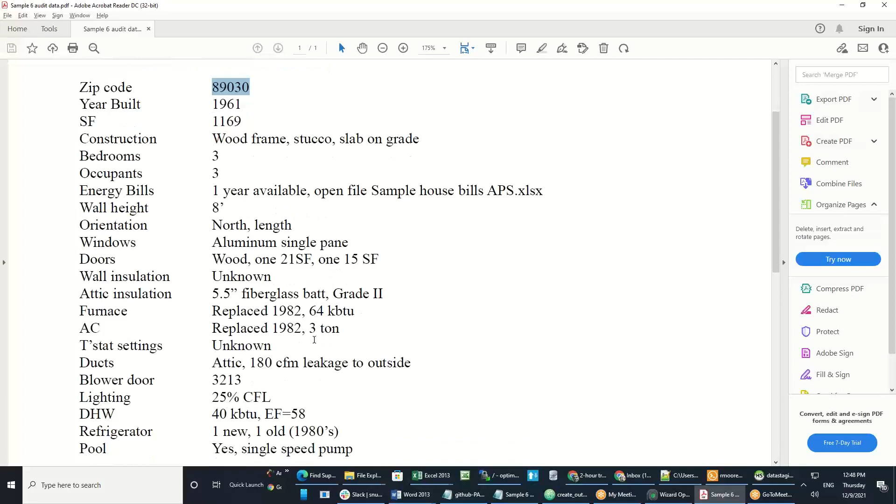For that one, yeah, and I'm not saying that's going to be true for everything. You can certainly do that. I just think, and maybe it doesn't apply to you as much, but for new people, generally speaking, instead of diving into the detail on every screen because you feel like you might be missing something, I would avoid doing that. That's especially true if you have some historic bills. The bills are really, really powerful. If you have some utility bills, OptiMiser is going to be able to pull out a lot of information from that and automatically calibrate a lot of those detailed values. So it makes it a lot easier for people.

I'm looking, this sheet I keep going back to is sample data sheet. This is some data collected on an actual building. I'm doing this because I have some actual bills and I want it to calibrate, so I'm going to use some actual values here. This is a three bedroom home.

North length. When I was going back and forth, I don't know if you noticed, but when you land here first, it hasn't loaded the weather data yet. As soon as you hit next, or you go to another screen beyond this, it asks you if you want to load the weather data. Let me just change this and see... no, didn't give me the question again. But at any rate, it gives you a couple of questions.

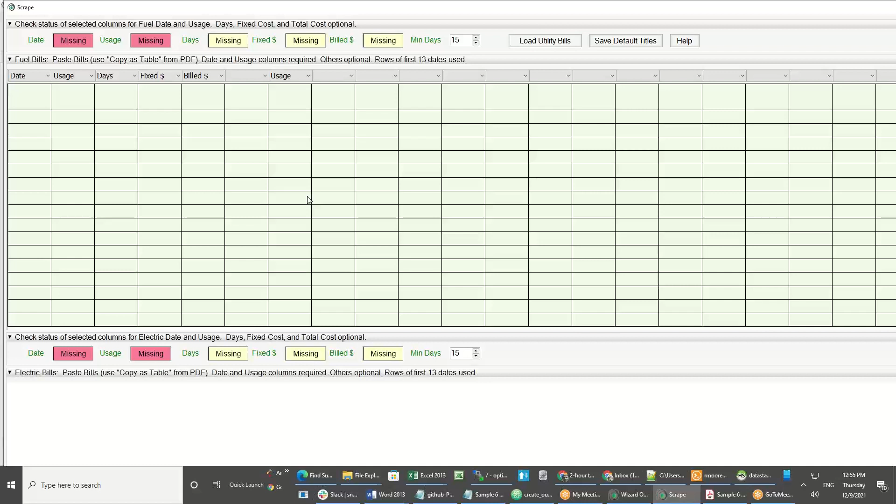So we have this scrape tool that makes it pretty easy. You load up this scrape tool, and I was on the detailed utility page. That's one area where I find it easier to use the detailed screen. It just puts both the fuel and the electric on the same page. I open this scrape tool, and it allows me to paste in any fuel bills I have and electric bills.

So I happen to have some in a text file. You could have them in a text file, you could have them in a spreadsheet, either way works. And you just copy the data. So I'm going to grab these gas bills, hit Control C, put my cursor in the top left box there and hit Control V, and it pastes it in. And then I just tell it which columns are which.

So if my data had it the other way around, if I had the usage and then the date, I just change the column and I'd be fine. And then if it's a spreadsheet that you're going to use a lot, you can set up your column headers and hit save default titles. And then every time you come in here, it will have those columns in that order.

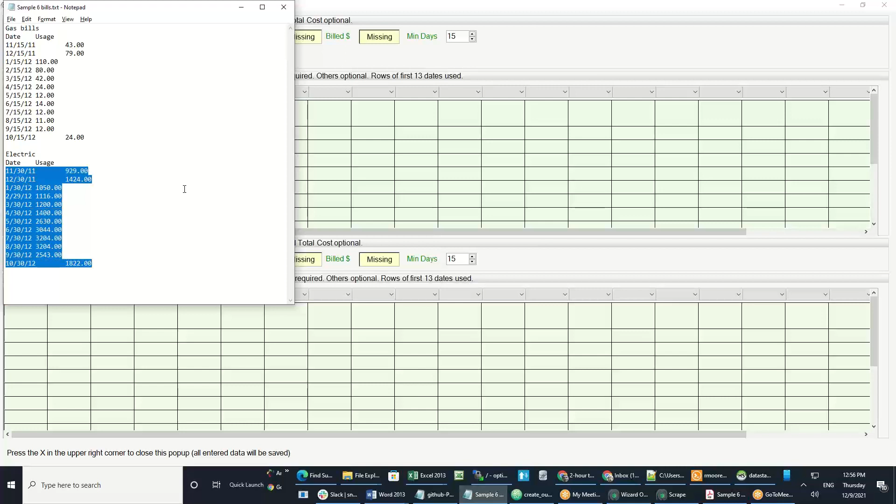I'm just going to get rid of these additional columns here. Okay, so there's my fuel bills, and I'm going to go back to my table here. Here's my electric bills. Again, I've just got the date and the usage. You can have a bill cost too. That's another way to get a utility price. If you have a cost in your bill data and you put it in here, OptiMiser will calculate a blended rate from the bills from that period.

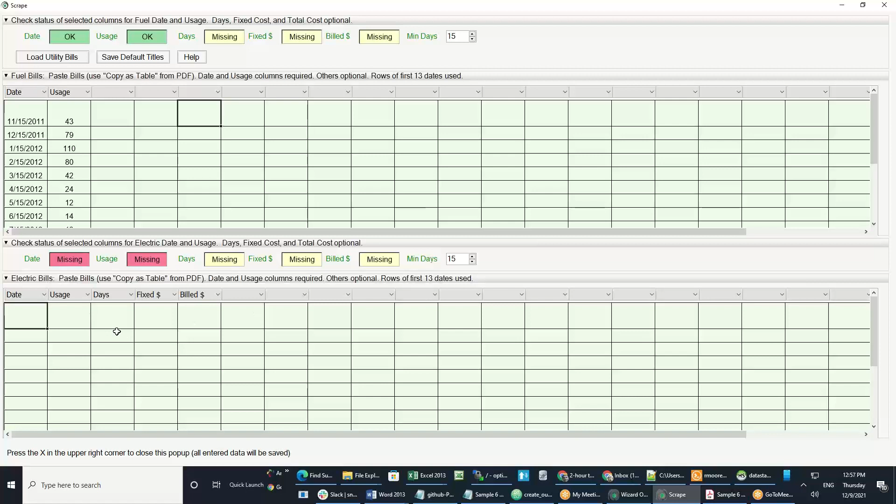Again, that's probably not as good as actually picking the APS rate if it's an APS customer, but it's something.

Okay, so all I've got in these is the date and the usage, and that's the minimum amount I need, is date and usage. Again, you may not have a metered fuel, it may be delivered, and so you could ignore it, or you could put in whatever information you have. So I'm going to say load utility bills.

And it just takes me back in here, and all it did was it popped these bills in. So the way this works is both the fuel and electric are set up with these sort of monthly time steps, but it doesn't have to be a month. And you see these bills, sometimes my read date changes.

It's important to put in, if you're going to take the time to put in bills, it's important to put in the actual read date, because if a billing period varies by even a couple days, that's going to make a difference in OptiMiser's analysis of the bills. So putting in an actual read date is important.

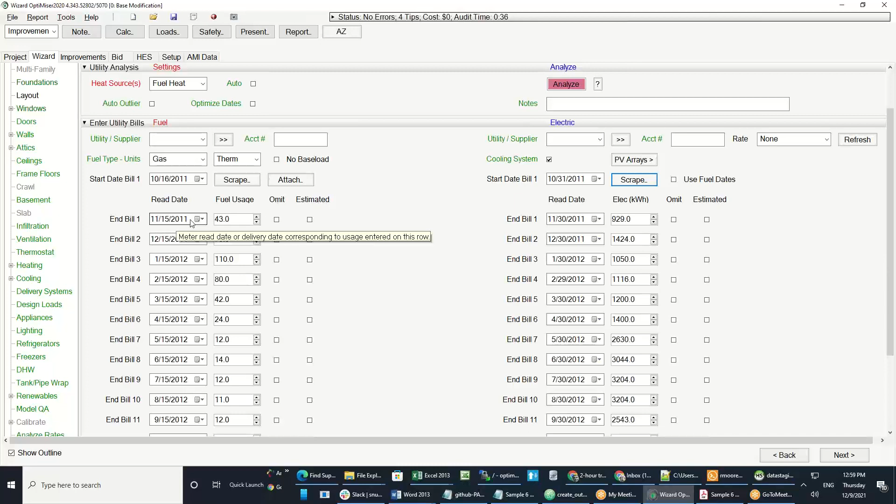If it was read not 1 month later, but 3 months later, then I would change this date to whatever that was, 3 months out, and put the total usage for that period. So you should never find yourself dividing or adding to try to put your data into a monthly bucket. OptiMiser will do that. It just wants to know when did the meter read, or when did this period end, and how much did they use? And OptiMiser will do the rest.

When it does its analysis, it will try to pull out those loads. Typically, it will warn you if it says you said it was fuel heat, and I picked up an electric heat source by looking at the electric bills. Do you want to change that? It'll give you a lot of feedback on how that goes. Let's see how this does.

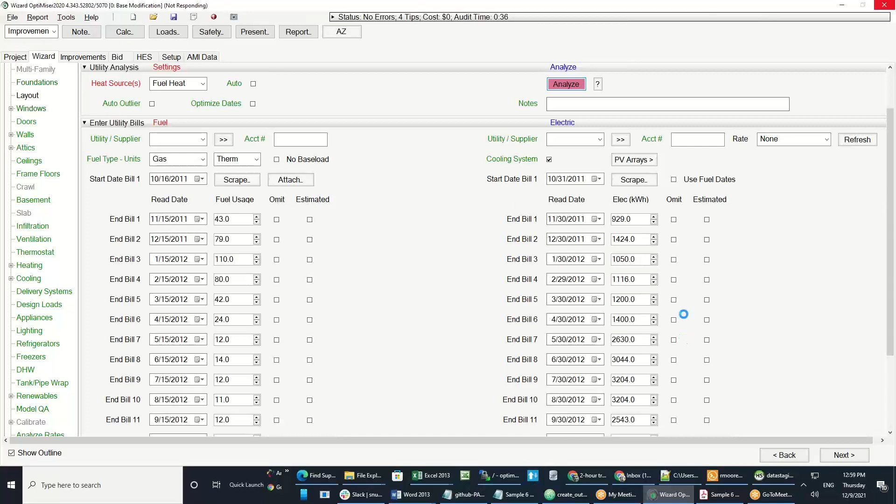So I hit analyze. I could just hit next, and if it detects that there are some new bills, it will do that. I'm going to hit next. So I get this utility analysis summary. This is basically what you want to see, this is the best you can do. It says the gas bill is qualified for advanced calibration and the electric bill is qualified for advanced calibration.

That means that I had enough information in there. I had 12 months of bills for each, and they lined up perfectly with weather in that period. So as it got warmer, my electric bills ramped up, and there was this nice regression. And now OptiMiser, we use a national standard to look at a bunch of different variables about that analysis, and we say, okay, we can calibrate the model to those things.

And you may get some other messages in here. It may say, well, you didn't put in any fuel bills, which is okay. If you don't have any information about what they did, that's fine. Or it may say your propane bills qualified for basic calibration because you only had like 2 values in there. And that's okay too. You just want to put in as much accurate information as you have.

And it really pays off. It really helps to speed the rest of the audit and to ensure that quality and consistency. These things are really advanced if you want to look at how it's doing the analysis and things like that.

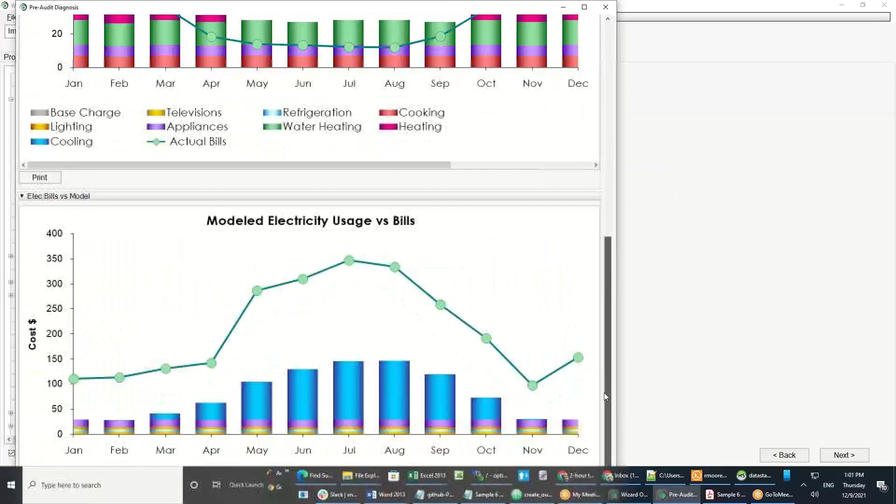The diagnostics - you certainly don't have to look at this as you're doing data entry, but it is just a preliminary cut. It's looking at like the default model in there, comparing it to what the bills are suggesting, and giving you some ideas of some potential issues that it's sort of popping out right away. There's overall low efficiency, both in heating and cooling. It seems like there's pretty low efficiency in there.

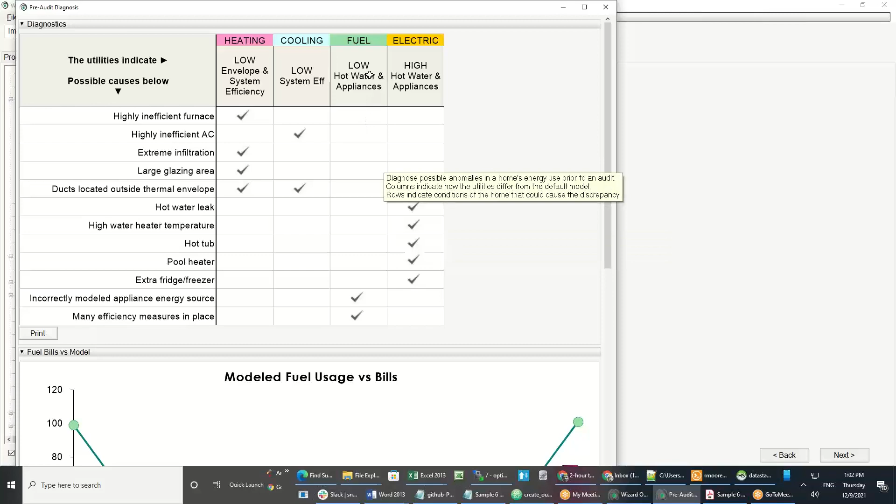There's something going on with the hot water. Probably we got to go make sure we've got the right fuel source selected. But again, we haven't touched anything in the model, so that's just a preliminary.

And then you can check the prices to make sure those are accurate. If I hit the more button on the prices, you see the EIA prices for this region. You can use those, or you can leave what's in there.

They also have, over on the right, you'll see fixed and escalation. The fixed cost is you can use a setup where you have a dollar per kilowatt hour cost and a per bill or per period charge in there as well. And then the escalation is used for whenever you see OptiMiser predicting out energy prices and savings going out into the future - it's using an escalation rate on the cost of energy, which is always defaulted at 5%, but you can change that.

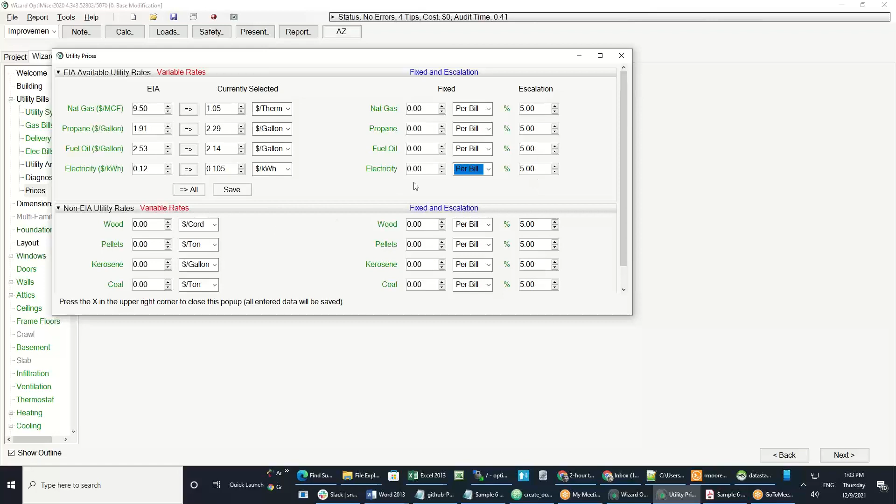All right, so that's utility stuff. I know some of you won't have them in there, but as I'm going through, you'll see I'll point out some things that it allows you to do when you have bills in there.

So dimensions are really simple in OptiMiser. You may have other needs when you're doing your audit process - your auditors may be doing full layout sketches so that they can indicate where things are happening in the building. Or if you find that you need to do a more advanced delivery system design, like whether you're doing it yourself or you have a contractor doing a duct design, you may want to do a more advanced sketch. But for our modeling purposes, in order to predict savings, we don't need that.

We really just need a conditioned area. And then if the house happens to have a basement - I know that's more rare in your neck of the woods - what this means is, if it has a basement, does this conditioned area number you put in there include the basement? In other words, is the basement conditioned? If the building doesn't have a basement, it doesn't matter, but that's what that means.

And then the length and the width, which it estimates, and as you change one, you'll notice the other one changes because it's basically just defining a box. And then what direction does the front of the building face, and is it the length or the width? And how many floors are there? And that's it.

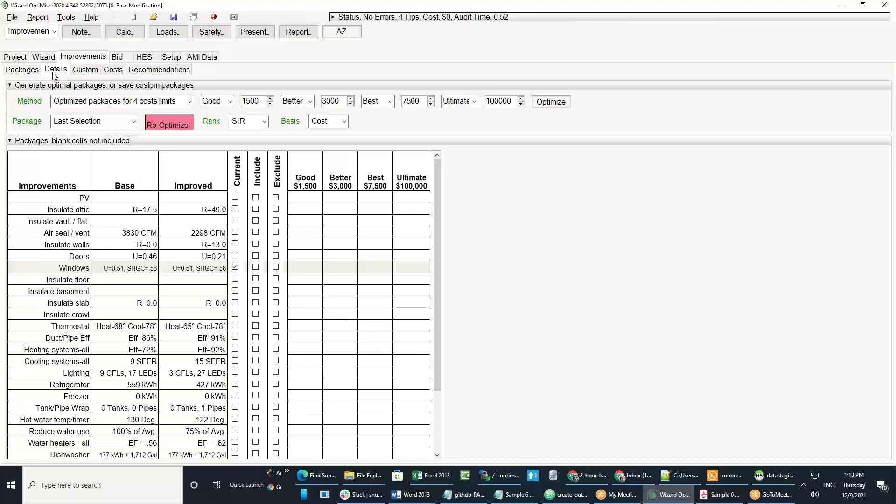Another way to look at that is if I go to my improvements tab, I can go to details and see what I've included and what I haven't. In this case, the only thing I've included so far is a window improvement. I'm adding solar screens, I'm not changing the window at all, and I haven't touched any of these other things. So even though there are default improvements set up, I haven't included them in my package, so they don't make a difference. I don't have to go in and change anything if I'm not going to touch those.

Okay, I'm going to skip down to walls. Wall insulation, if you don't know exactly what's in the wall, you can pick one of these categorical responses, like it's either completely unknown, or maybe you or your auditor knows based on the vintage of the house, or if you've actually poked a hole in the wall, then you can certainly specify it. But you don't need to, and probably should not make guesses if you don't have that kind of precision.

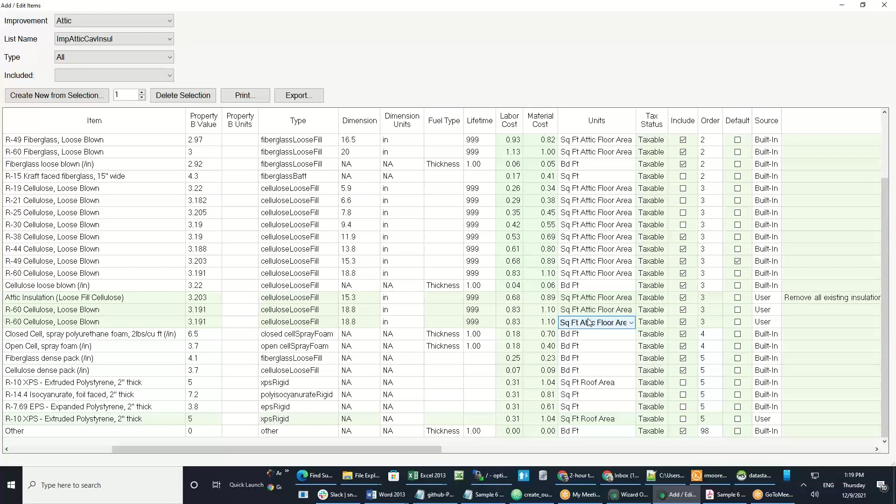Some lists also have per-each pricing, like for HVAC or DHW stuff, you can put in per-each pricing, just total prices. So it's pretty flexible, but it is a complex system when you first start.

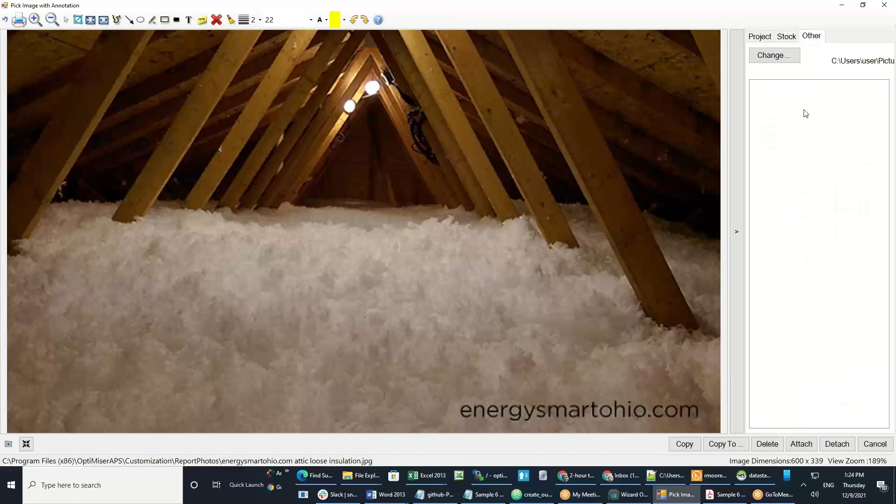The way it works is you can pick any photo that's on your machine. It's got to be a local drive, so you can download them. If you've got something that syncs to your iCloud or whatever, you have to have it in a locally synced folder - it has to be on your machine somewhere. So you either transfer your photos over, plug in your IR camera and download them, or whatever you can do - you have to get them locally.

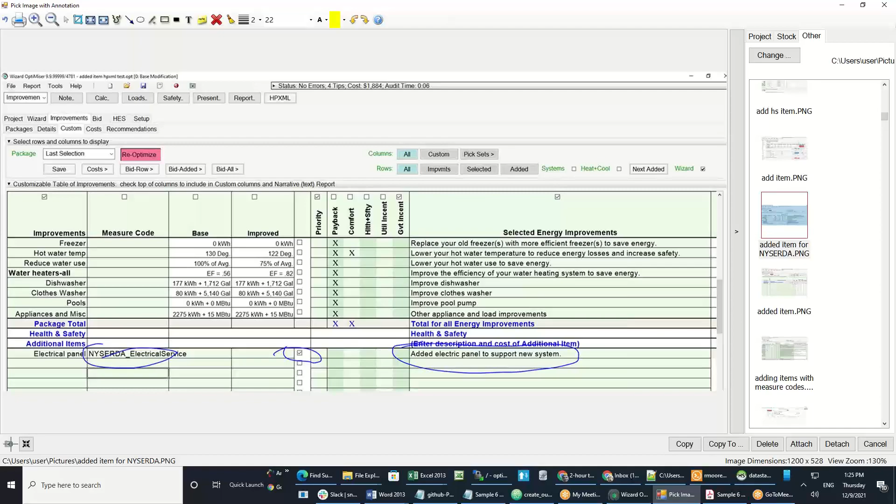Then you can look at any folder on your computer, navigate in and see all those photos, and you just hit attach here. I don't have a camera, I'm on my desktop, but if you're on a tablet or something with a camera, it will load the device camera automatically and give you a shutter button so you can snap photos for that photo slot. So that's available as well.

Ceilings are for closed cavity ceilings. So if you have sloped ceilings that form the thermal boundary in a room, you can specify improvements and put in existing conditions for your slope ceilings. You can specify that either as the footprint - the top down area - or as the actual surface area, either one. If you put in, say, 500 square feet of footprint area and it's a 5 to 12 pitch, it automatically calculates the actual area.

Again, frame floors - I didn't put any in there and I'm not going to in this house, but if there was a room over a garage, I could put that in here and put my improvements in.

The infiltration section, obviously really important. Most of you probably have a blower door for doing audits, so that's pretty straightforward - you're putting in a CFM50 number. If for some reason you're not, there's an estimate entry, an alternative entry with ACH, air changes per hour, kind of estimate in there, and you can give it a range as well.

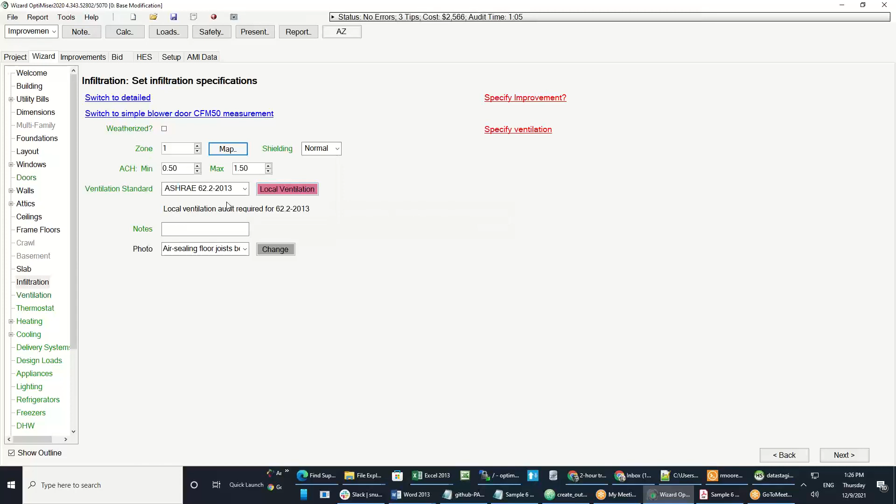It makes a little difference. So again, you put in your blower door number.

For the ASHRAE 62.2, you have to fill out the local ventilation information, and that's used to calculate your minimum ventilation requirements, which are expressed on the improved side. To see that number, you have to open the improvement area, and it shows you what the minimum CFM50 is. It's red here, saying local ventilation is required, so this isn't going to be accurate until you finish that local ventilation if you're using the updated 62.2 -- well, I guess it's out of date now, but the 62.2 2013 standard.

Then your improvement you can specify as a percent leakage reduction. We also have an option to specify it as a leakage reduction just in the attic, but generally speaking, you apply it as a percent leakage reduction. You can also create a more specific target for your CFM50 reduction number.

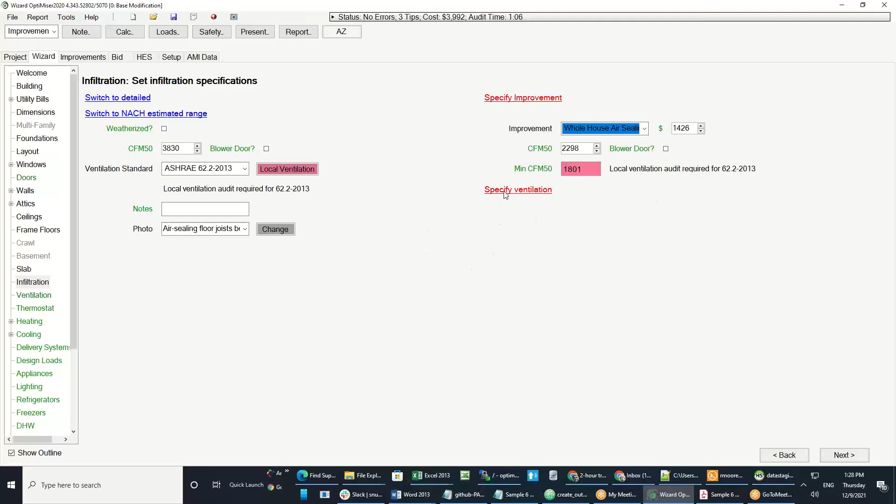And then there's mechanical ventilation as well, so you can do whole house ventilation. You can add ERVs and HRVs.

Thermostat set points -- we get quite a few questions on this. So let's say I do just a one setback programmable thermostat. Because I have bills entered, it's giving me both ranges and that setback. So it's giving me, for heating, a day and night target, and for cooling, a home and away set point, and each one of those has a range.

Your heating and cooling can't overlap. Some people push back on this, but that's just the way it is in OptiMiser. I get people that say, well, they want to heat it to 75 and cool it to 70 or something, but they can't overlap in OptiMiser, so you're going to have to do the best you can.

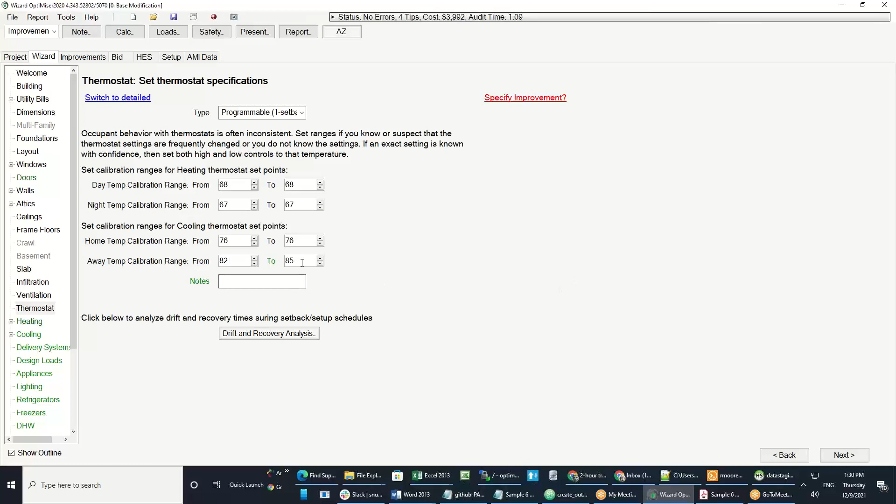The ranges here will only show up if you have bills entered, and they're there to do some calibration. If you actually know their setbacks and they're not messing with it, and they don't have a smart thermostat so it's not doing any funny drifting, then you'd just put these to the same value. So instead of giving it a range, you'd say, I know it's 68 during the day, and at night they let it go down to 67. And for cooling, I know they cool it down to 76, but when they're away, they let it go up to 82, let's say.

On the improved side, all I'll say is you can set a smart thermostat if you're putting one in, so you can have a cost item. But we're not modeling the controls -- we're not predicting what your smart thermostat is doing. We're not modeling out the Nest algorithm and how it's going to change things by half a degree over the next month or whatever. You have to set this as your best estimate of what the improved set points would be if you're going to change the set points. So if you're putting it in and programming it for them, that's something you might know. If it's a smart thermostat that's going to change them itself, you may not really know that. But either way, we're not trying to anticipate what the smart thermostat is going to do -- it's just a way for you to put that in the report and show that there's some cost there.

You can put in improved set points, again, if you know what those improved set points are going to be.

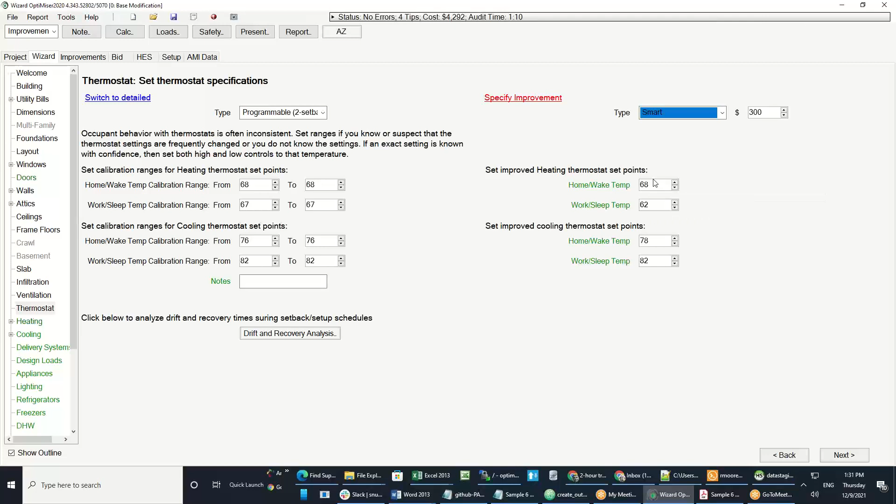Okay, heating and cooling. The way this is set up, like all the other areas, you have the existing conditions on the left and the improved on the right. I'm going to open the improvement side here so we can see these lined up, and I'm also going to add a second system type.

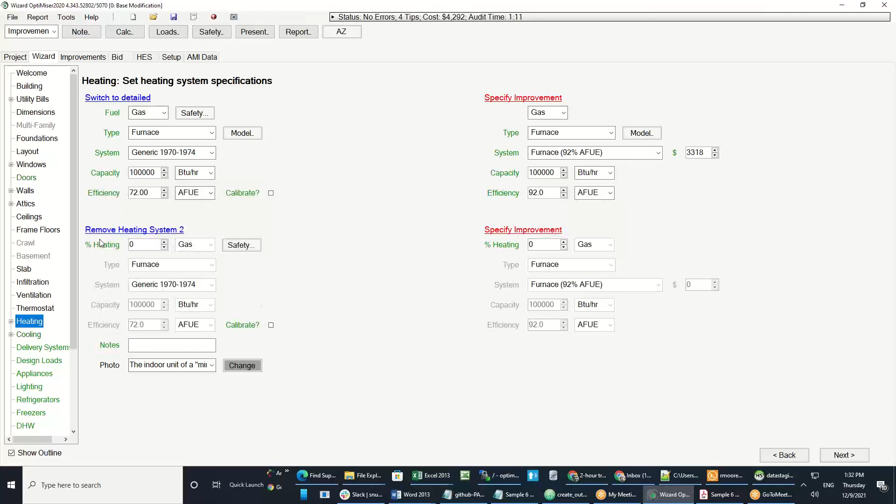So in the top row here, you have the first system on the left, and then what I'm going to do to that system. On the second row, I've got these set up, but right now they're not affecting the model because of this percent heating control here, which asks what percent of the annual heating load is met by this system. You have to tell it that before it'll actually include that system.

So say for example, if I had a second gas system, I would just add some load there. And if they're both the same fuel type, you could do it by area. If I know that it serves half the area, I could say well, that serves 50% of the heating load.

If it was a supplemental system, let's say they had an electric baseboard, and it's 20% of the load, we could put that in like that. And it's as simple as that.

And then each one has an improvement type. So maybe you're going to improve the furnace so that they don't use their electric heat anymore. You could say, okay, well, on the improved side, this is going to go away, it's going to be 0. And now 100% of the load is going to be on this new furnace that you're putting in. It's going to be a 96 AFUE super furnace.

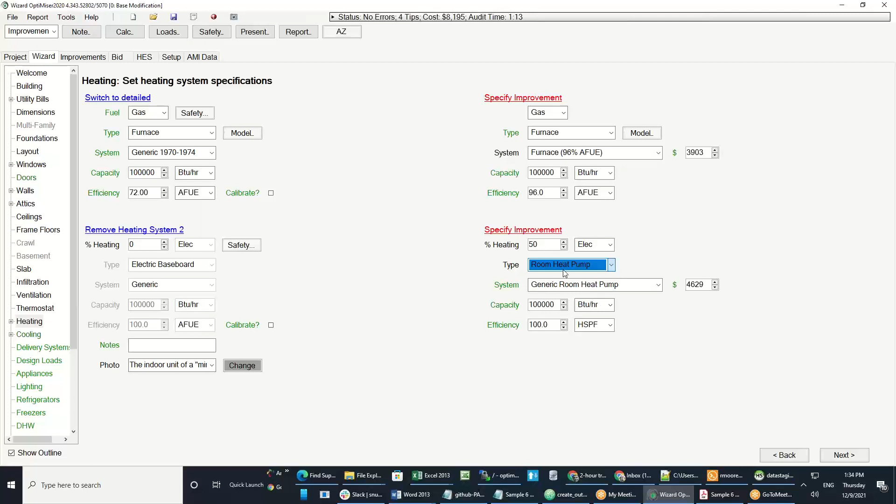So when I added that, now I've got one system on the left, because this doesn't count since it's got 0% of the load. And on the right, I've got a new furnace and a mini split.

Now, what if I don't want to do the furnace? Well, I'll say no improvement. So now I've got my existing system, that's going to stay, and I've got this new mini split that's going to take 50% of the heating load.

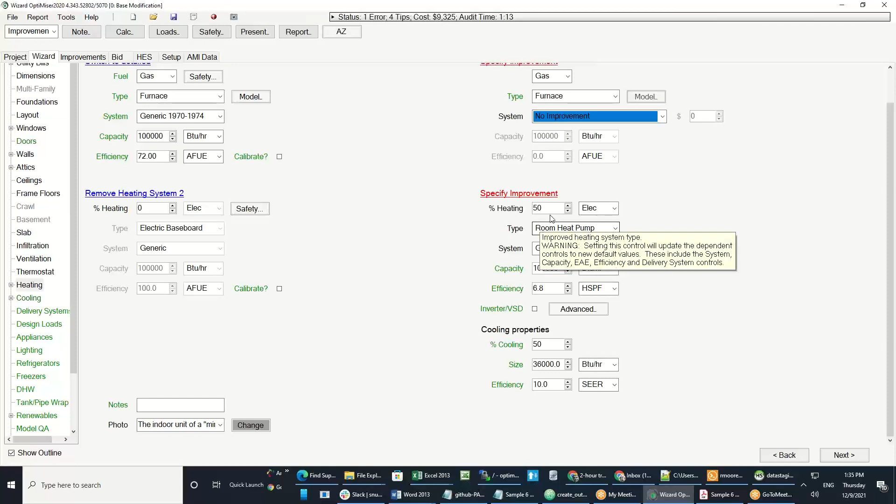That's a tough estimate to make, but we have some help online about doing more advanced estimates of the load splits, and how in some cases the utility bills can help guide that.

But again, up top, we've got this existing system, we're not going to improve it. And then we've got a second system that we're adding. So it's 0% of the load on the existing side and 50% of the load on the improved side.

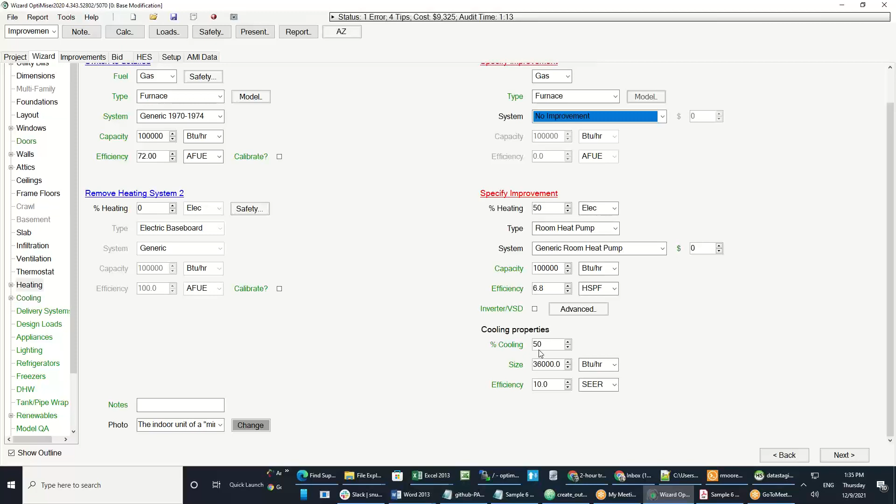And when I said it was a heat pump, it gave me the cooling properties here as well. So I'm on the heating screen, but I can adjust the cooling properties. So if I go to the cooling screen, I didn't know ahead of time what my default was here, but now I see that I had this.

This is describing an existing central AC system, and it has an improvement here. So this is saying I'm going to replace the central AC system, and the delivery is shared with that furnace. And then I'm also adding the mini split.

So that might be the case, or maybe I don't want to change the AC system. So if that's the case, I would say again, no improvement. So I'm not going to change the central AC system, but I am adding this mini split here.

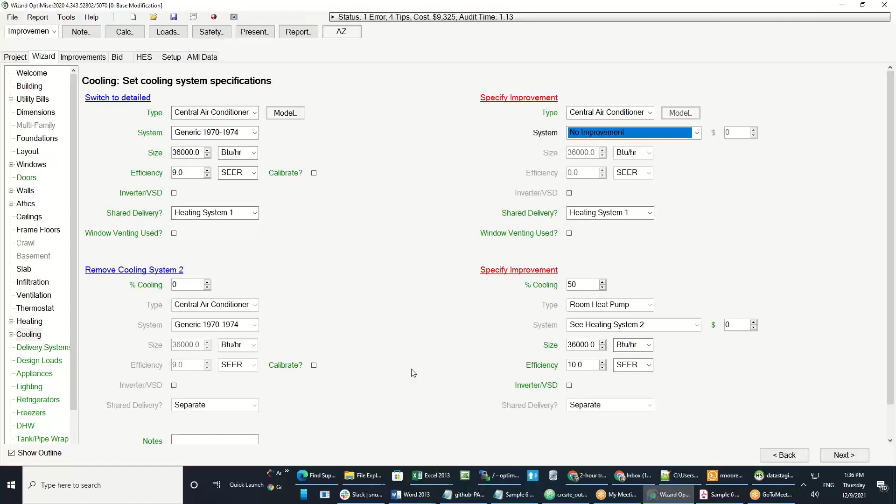And then when you get to delivery systems, they should be set up in a sensible way. So if you get to the delivery system and you're seeing multiple sets of delivery systems when you only have one in the house and it's serving a furnace and an AC system, then there's an issue, and that's a sign you want to go back.

So there's a lot of logic in here that drives this screen, and it should be set up so that it's describing what's going on. So you set up the heating and cooling systems a certain way, and when you get to delivery systems, it should reflect the reality. So in this case, I've got one, it's serving a furnace and an AC system, and that's all there is.

So the important control here, these are all critical controls, but right away, the location is really important, because if you put the delivery system in conditioned space, then obviously doing work on it isn't going to have the same savings effect. It might be critical for comfort and the actual operation of where the air is getting in the house, but in terms of overall savings, it's not going to have that big of an impact.

So if it is partially or fully in unconditioned space, then make sure you indicate that. So if it's partially in the attic, you might say, well, it's 50-50 attic conditioned. Or if it's entirely in the attic, you can do that. And there's two ways to do leakiness. You can do a general observed estimated leakiness, or you can put in a CFM25 value.

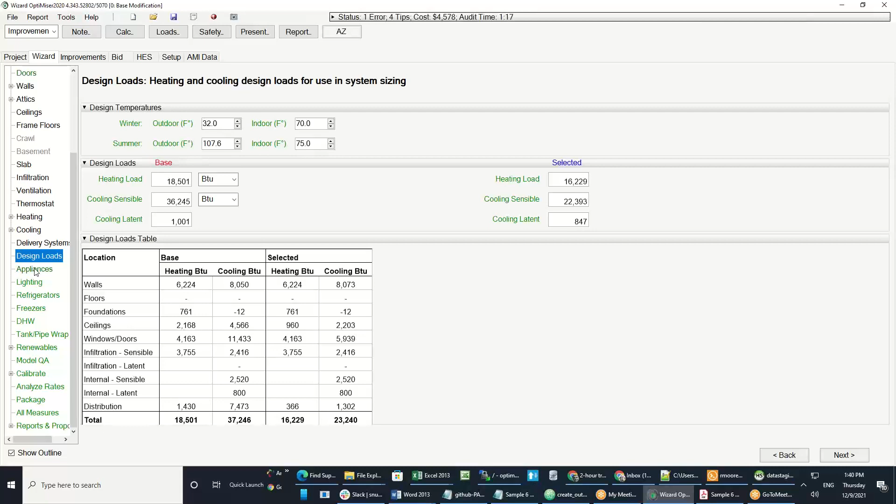That's also available on the report as well, for your base load audit. This will depend on your needs and on the customer, but the wizard appliance controls are very simple, as you see. You're basically just picking between a few different dishwasher and clothes washer types.

You do want to make sure you set the dryer and range fuel, because if you leave that as gas and there's no gas service to the home, they'll see that on the report sometimes and say, wait a minute, this isn't my house, I don't have any gas. So make sure you select the right fuel type.

You can put in an EV if they have one, a simple addition of electrical load to charge it, plus quick hot tub and pool pump controls. There are more advanced controls if you go into the detail, and it's possible to do a really deep electrical audit on the detailed screen. That may be your process if you've got a particularly large house, a customer with a lot of people, and you really want to dial in that base load side.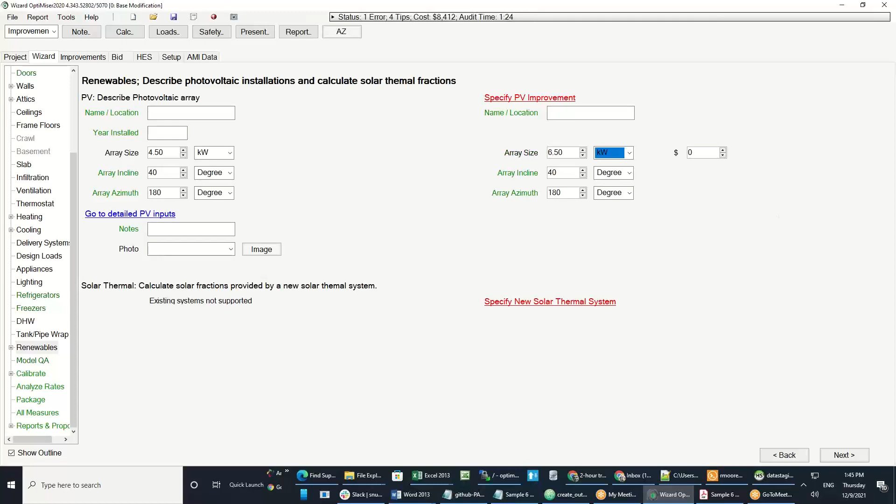And then there's some simple tank and pipe wrap controls. For renewables, if you've got an existing PV system, the simplest thing to do - the bare minimum - is just to put in the capacity, the array size. They've got a 4.5 kW system in there. Same thing if you want to specify an improvement, you can just put in, I'm going to add a 6.5 kW system. But if you're into PV and want to integrate that with your OptiMiser audit, it's got a fairly full-featured PV toolset in here, including financial analysis and monthly production analysis. You can save a selection of panels in here with all their characteristics so you can easily specify a system for somebody.

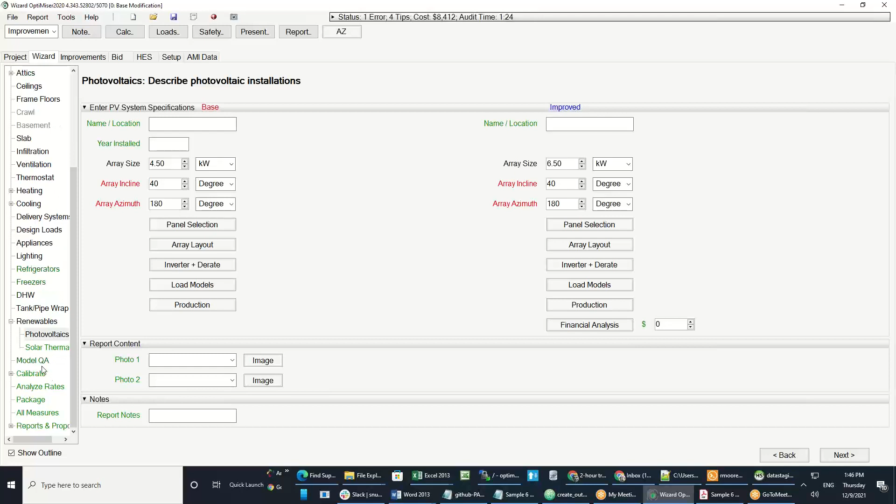Model QA - this is a good way to get feedback about how you're doing. So I've worked through all of these sections of the job, putting in the information that I gathered. If I come here, you might see some issues that are red - I'm surprised I didn't because I went through so quickly. Those have red stop signs, and they're the most critical. These yellow ones are more lower level warnings.

This is just saying that the capacity of the heating systems is a lot higher than the design load, which is not surprising to me. But sometimes you'll have things in here where it will catch if you've used the wrong units for something, like if you're used to specifying cooling in tons and you left the control in BTUs, and it's saying, okay, it looks like something's really out of whack here.

And these are links, so you can click on these and it'll take you right to the right control. Once you've cleared those up to your satisfaction - and again, they don't have to all go away, they're just for your information - I'm just going to leave that one and go to calibrate.

So this is where it's actually doing the calibration to the bills. And again, you won't get this if you don't have bills, but this is where it's saying, I put in a bunch of information - some of it was specific data points, some of it was ranges, some of it was categorical information. And it's going to now model 100, 1,000, whatever it needs to do, to find the one that best fits the utility model - that weather normalized utility information.

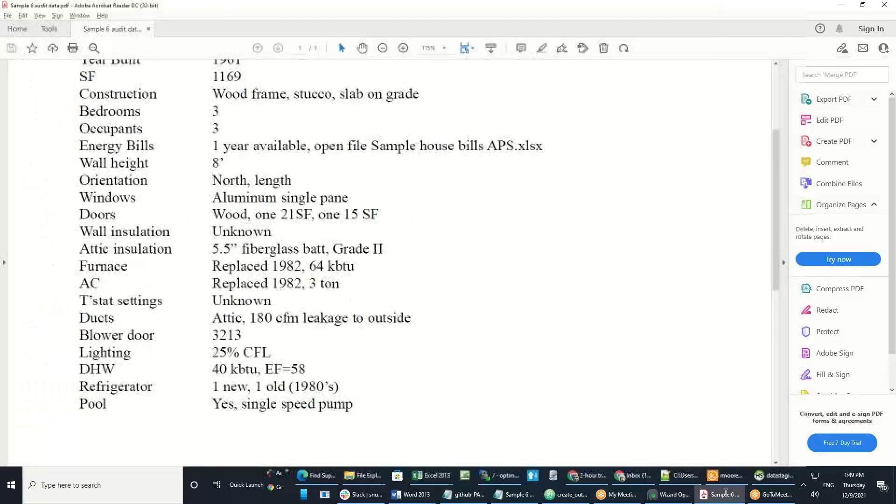So this is saying that I've got some major errors here because I didn't follow my script - I was actually just putting in random information. I was so excited there. But if I actually put in the information about this building, it would have snapped in. Because I just was guessing about the systems and the infiltration and everything, it actually is too far out of whack for it to pull the model in line.

So it says you're 43% off. My model is saying, well, you're only going to use this much gas and this much electricity, but my utility bill said I'm going to use this much. So for some reason, I made a more efficient model than I should have. If they're anywhere near close, it will snap right within 5%, and that's the target - you want to be within 5% for each fuel type, so your total MBTU should be within 5%.

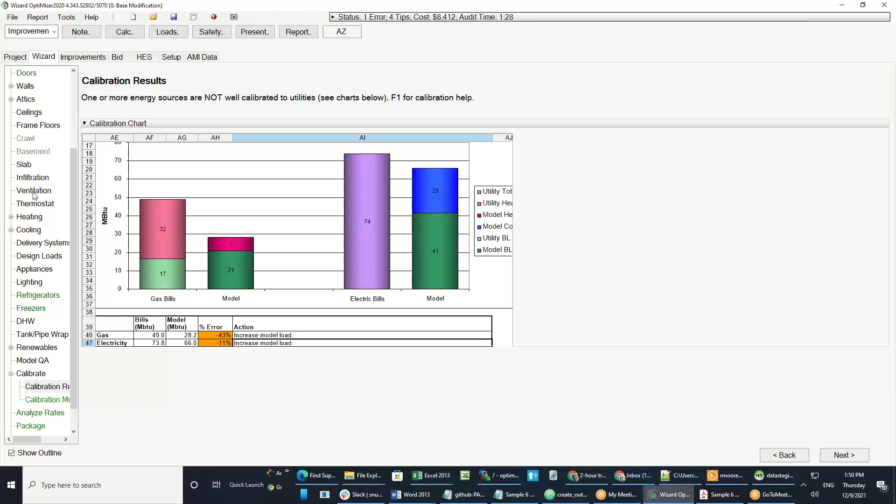In this case, I would be closer if I had paid attention, but I didn't. So maybe the house is leakier than I had put in there, and maybe my cooling system is less efficient than what I had originally entered. If I reran that calibration, it might snap those numbers closer together.

Those are the times when, if you can't bring those together by tweaking all of those things through their ranges, then there's definitely something wrong. There's probably a data point that was missed, or maybe a unit that was put in incorrectly.

And the thermostat settings as well. If you've got default thermostat settings in there, and you don't know if that's what the customer actually has set, you might want to widen out those ranges, because I've seen it calibrate hundreds of times in a lot of different building scenarios and bill sets, so it is very good at it. That should snap together pretty close, within about 5%.

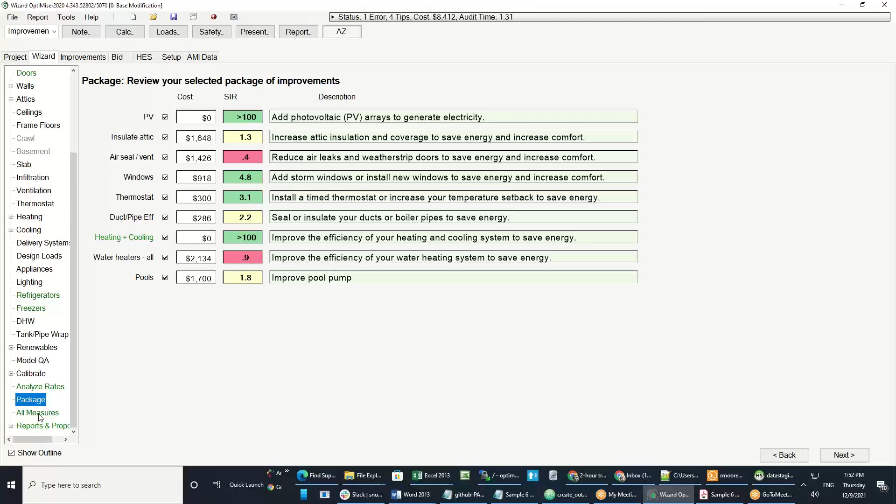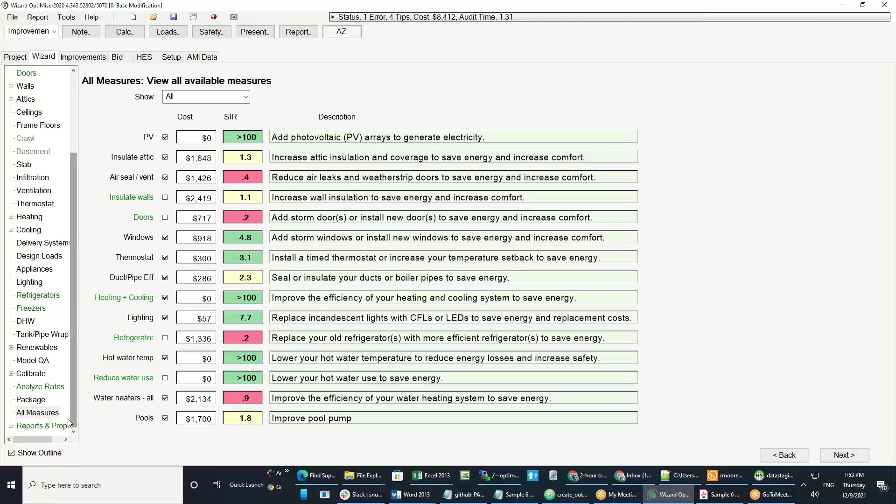Package is a quick way to look at the items you selected as you went through the audit. You can also see other measures if you go to all measures. Say, oops, I forgot to recommend more LEDs, I'm going to click lighting. Oh, and I also wanted to tell them to reduce their hot water temp, so I'll include that one for free. And then if I go to reports and proposals, this is some good summary information here.

Health and safety - you can access the CAS information from the heating and cooling area as well, and from hot water, but if you hadn't done it yet, you can get to it from here. You can also get to it from the safety tab. The stuff on this health and safety screen mirrors the same controls - general health and safety information here, bath fans, sewage sanitation.

These don't affect the energy model. These are just health and safety information, and you may have action items that are cost items, so they're a chance to add to the project scope there. And then you have CAS testing as a separate thing.

So if I go to the CAS analysis, this is where you put in your actual combustion testing information - the CO and leak spillage and that kind of thing - which can be summarized on the report as well.

So, my health and safety - the other thing at the end of the wizard here are the notes and photos. This is a great control set because it summarizes all of the areas where there's editable content in the report. There's all these different areas - attic ceiling, photos and notes.

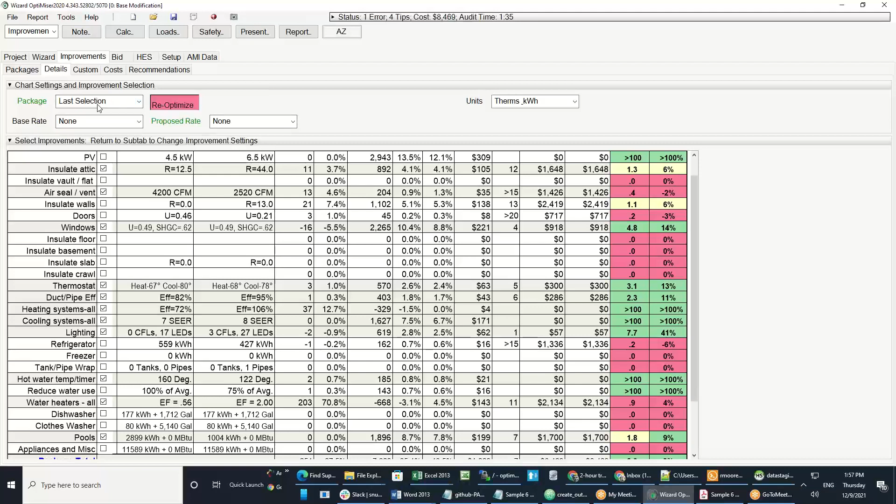Custom is another way to look at your improvements. It's a way so you can actually change the names and descriptions of these items, and add your own custom items down below. These custom items don't have any energy savings, but it's a quick way to add cost items into your package. So you could add the kitchen sink and put a cost in there, or repair the porch, or whatever you're going to do.

If any of you are qualified DOE home energy assessors, this is the HES screen. It automatically can generate an HES label through the DOE's Home Energy Score API. You do have to be a qualified DOE Home Energy Score assessor, so you have to have an assessor ID and a password from them. But otherwise, it's very simple to use.

There is a small fee, an additional fee with each job that you get a home energy score for. But it's very simple, and the label can be integrated into the report. So if you want to provide home energy scores, then this is a great, easy way to do it.

All right, I am going to jump into the report and see how this information that we entered flows in here.

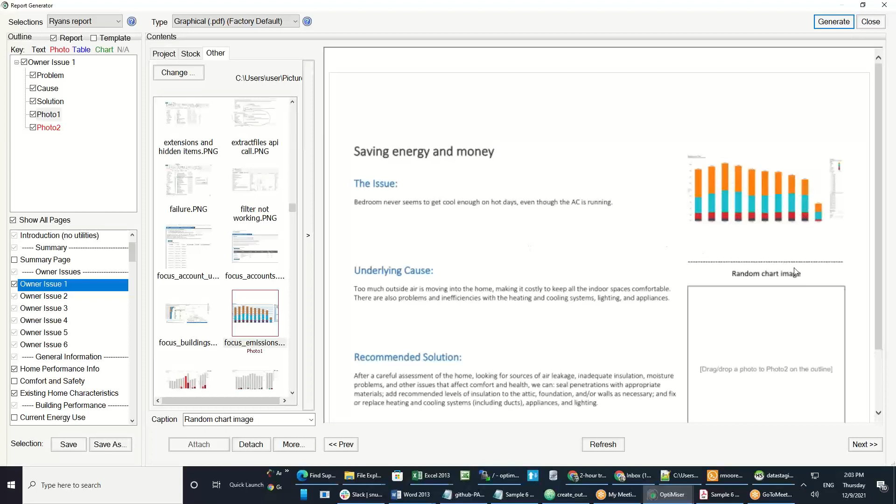If I click on those, I get my photo picker and I will add one of my photos in there and it shows up in here. And then this one happens to have a default caption. The captions are down here. I can change that, and then I hit refresh to see my updated caption. All right, so that's an

owner issues page. There's a bunch of different types of pages in here. Again, you'd want to go through, check them out, see what you like, and maybe put together a couple selections for a few different types of reports that align with your process.

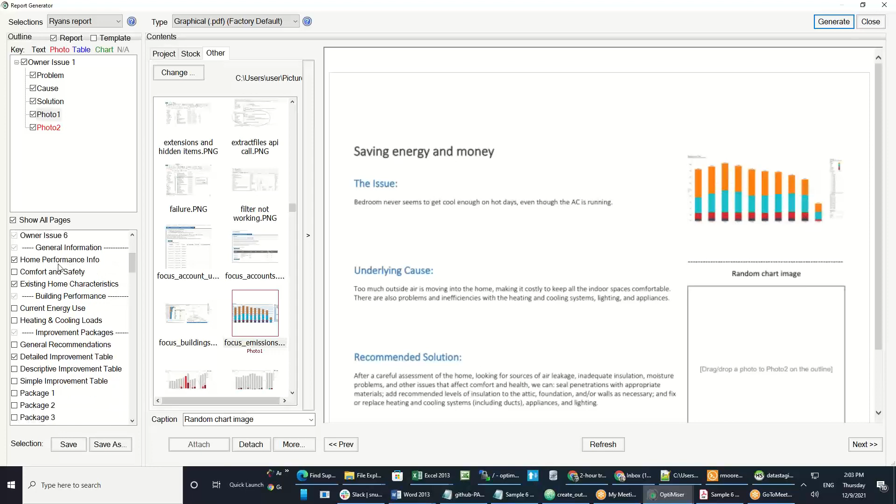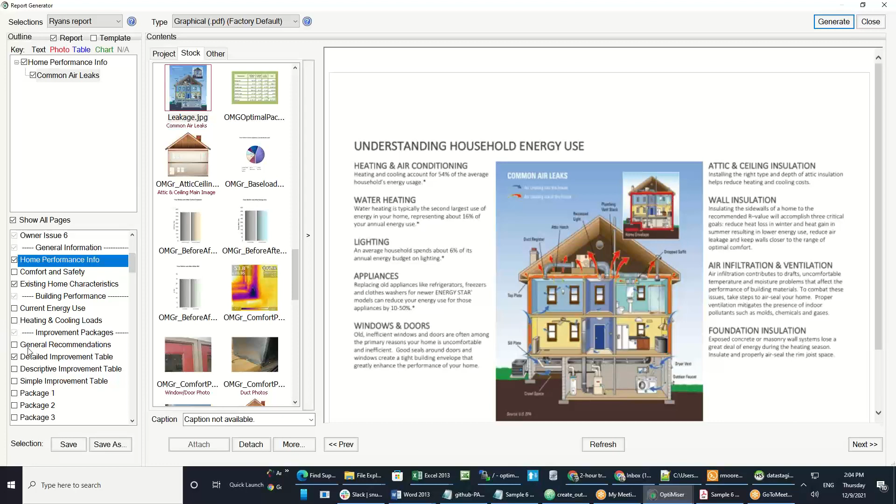There's general home performance info. You've seen this before, this EPA Energy Star image. There's a summary of existing characteristics where it sort of dumps out all that information you collected about the existing building. There's breakdowns of current energy use and then the heating and cooling loads, and specifically this will list all the fuel types. So if you've got a third fuel, like propane or something, that'll be listed in there too. And then there's different ways to show the improvements.

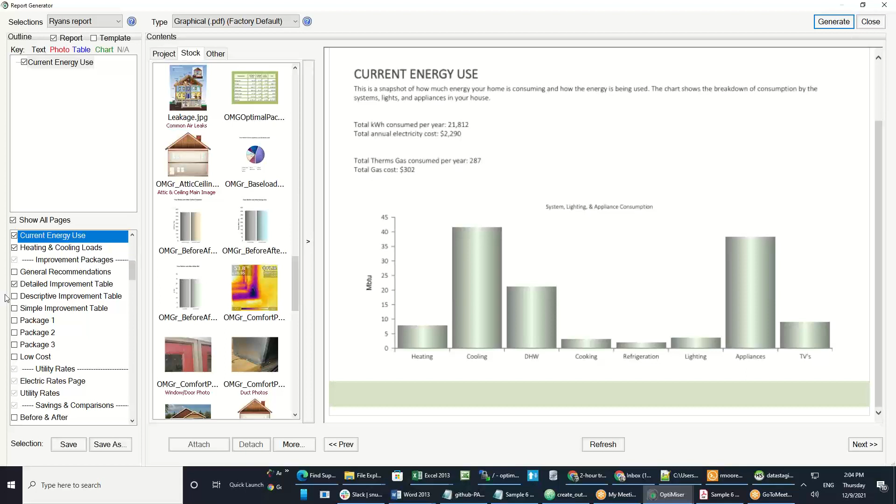So these are, you probably just want to show one of these. We do have the opportunity in OptiMiser to do multiple packages, so you can show multiple improvement options if you want. But here's one instance of that.

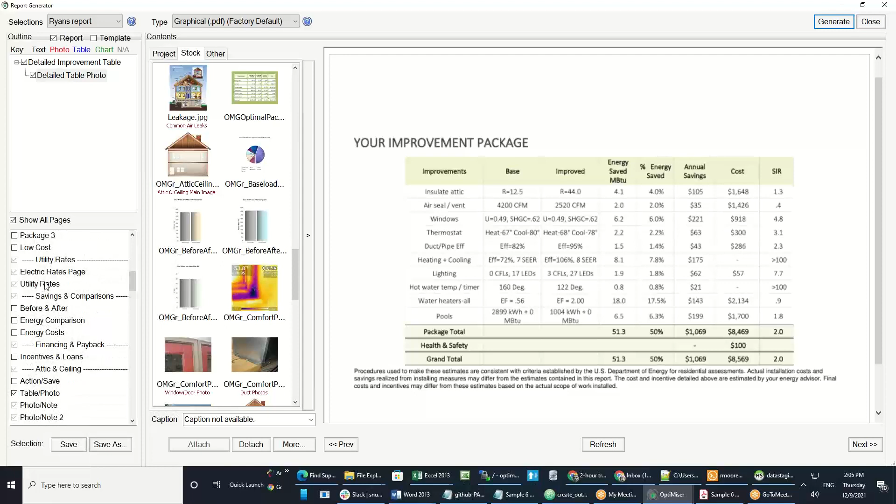You can show how... oh, this is rates, I'm sorry, I didn't mean to show that. I didn't put any rate information in, so I wanted to show the energy cost going out into the future. So this is where that fuel escalation and inflation comes into play. You can change the inflation rate that's in there as well. So that shows that.

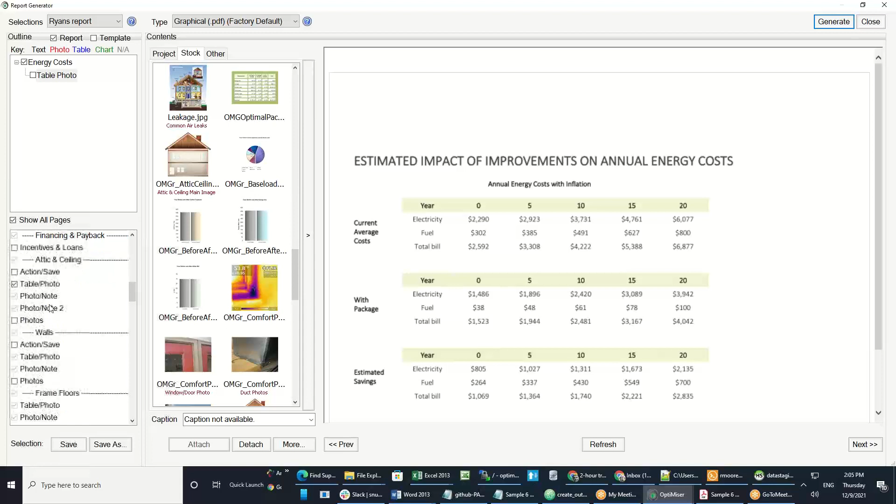Information about financing and payback. And then each area of the house has a page that looks like this that presents details about the existing condition and the improved condition and gives you the opportunity to again add more text, edit the text that's there, change some photos.

And you'll see that there are multiple photo pages for each improvement area. So if I had additional attic photos, I can go to my second photo note page. I can add 4 photos, multiple notes. Again, I have another page. So you can really add a ton of photos in each one of these areas. And if you go to the end of the report, there's a bunch of extra photo pages as well. So there's lots of photo slots.

Ryan, with those additional photos you're adding, do those show up on that report? Because you see how they're on a different page? Yes, once you check that box and we print that report, all those additional photos, even though they're on a different page, will come out with that report.

And this, unfortunately, you can't change the page order. So if you had, let's say, 20 attic photos that you wanted to be all together, it's not going to be all together, because you might have something like 12 or 16 photos in the attic section, and then you go into the extra photos and they show up at the end of the report. Got it, okay. They do have captions though, so you can caption them. Awesome, yep.

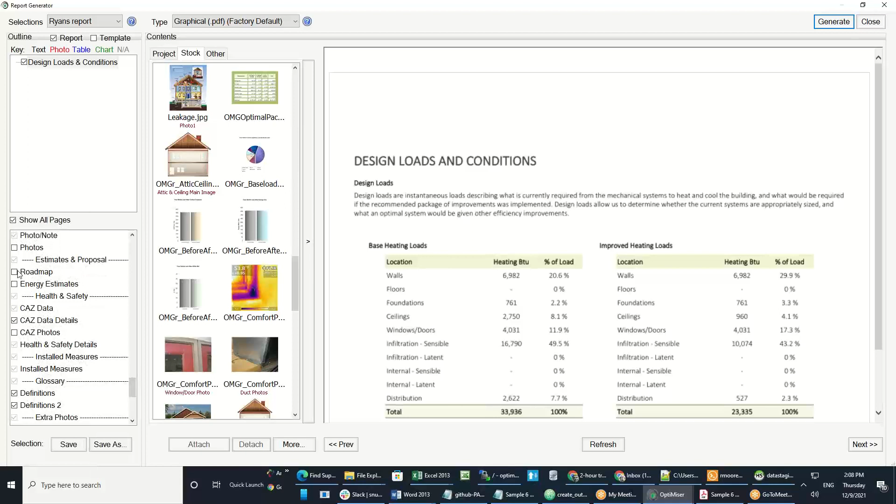Roadmap is a chart that shows anything you haven't selected. It shows your existing home, your energy costs as it stands, your energy costs after your proposed improvements, and then anything with an SIR greater than 1 that you haven't included that you could show as a future potential upgrade.

So maybe you did a thermal imaging and said you should really re-insulate in this area, but they're not convinced and really don't want to do it. You can include it as sort of a roadmap future thing they can come back to.

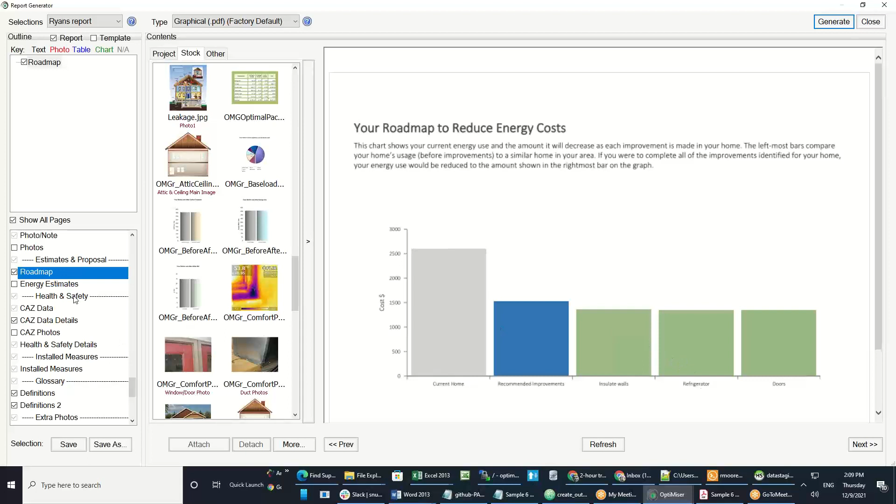The energy estimates page is basically a description of what OptiMiser is doing. So if they're wondering how you came up with these estimates, this will describe why you went to the trouble to collect their bills and what kind of work you're doing.

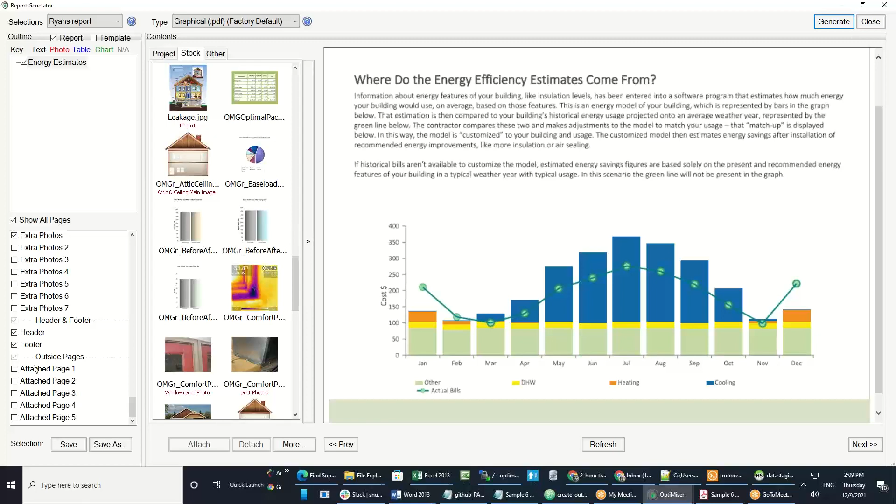And then it goes through CAZ and health and safety, has a glossary, and then extra photo pages. You also have the ability to attach PDFs, so if you have manufacturer's sell sheets on Mitsubishi heat pumps or whatever, you can attach those.

The way you do it, if you look at the preview, it gives you a little instruction - well, it just gives you an error, but basically you need to put in an absolute reference to a location on your computer. So if you had a PDF in your downloads folder, you could copy the address on your computer and put it in here.

That didn't work very well, but you would put the absolute address in there. So it's not a perfect solution. It works best if you have some stock pages stored somewhere that aren't going to change. So if you keep a Mitsubishi sell sheet in a specific folder on your computer, find the address to that folder, put it in here, and you can include that at the end of the report.

You can do that for up to 5 different PDFs, but of course the PDFs can be multi-page. So if you combine them, you can put in any number of PDF pages at the end.

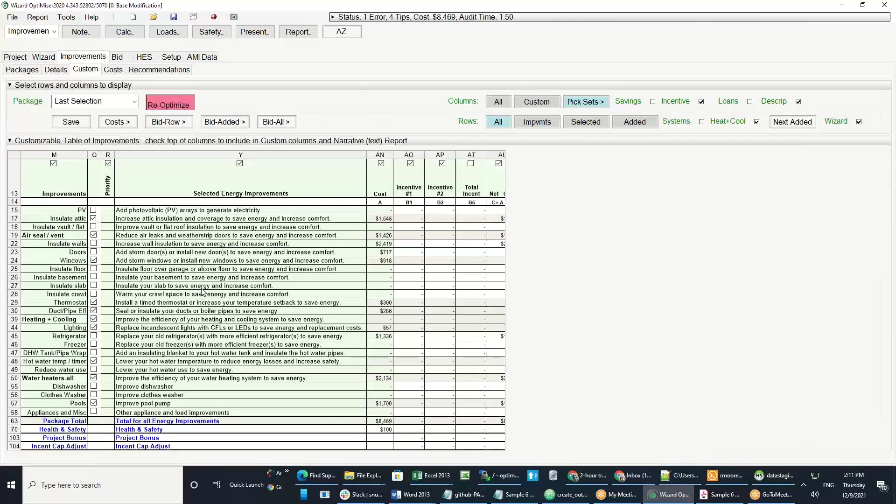...or I was trying to replace this air conditioning system, but it ended up adding another air conditioning system. Then what you want to do is hit the send error report button. Those are just examples.

It could be anything going on in a specific job, and it will pull in the name and email if you've got that in your registration file locally. If not, make sure you put in your name and email if that's not there. You don't have to worry about the assign to field.

And then you put in a little description of what's going on, like 'AC improvement savings looks weird.'

This is kind of important - if the issue involves the report or photos, like you put a photo on the cover page but it refuses to show up and it always brings in some other photo for some reason, make sure you check that box, because otherwise it won't. If you check it, it scoops up all the information about the photos you're trying to attach and the reports that you ran. If not, it won't, because it's a lot of data, so it doesn't do that by default. Make sure you check that.

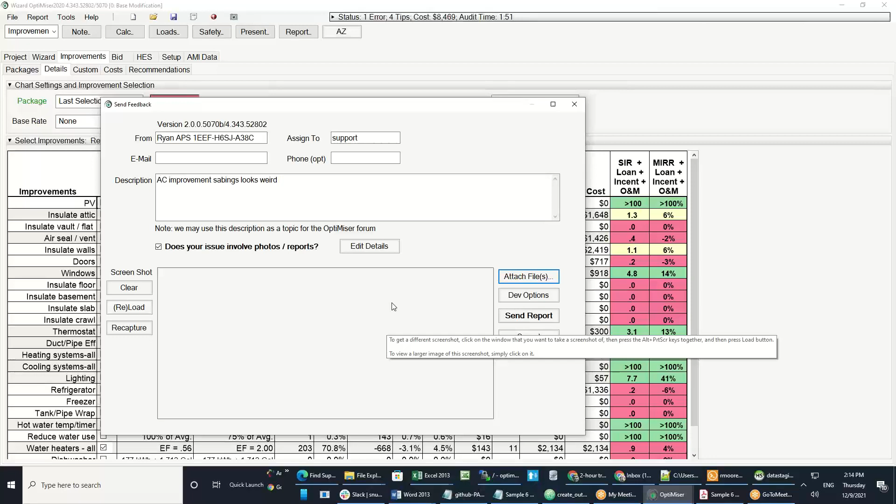If you want to attach another one, just take a screenshot anywhere and attach it as a file. You can attach anything - you can put a bunch of photos in a Word doc and attach that if you want, and then hit send. That'll get queued in our issue report system, so no one loses track of it. Someone's always monitoring that, and they will get back to you and say okay, this is what you do to fix it, or we need to look into it, so you know that's being resolved.

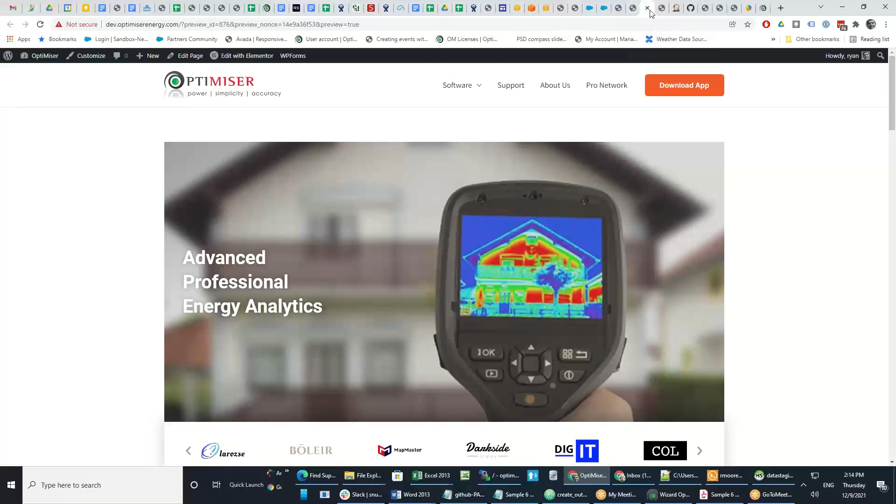Other options for more training and support type questions. If you go to optimiserenergy.com, there is a whole support area. There's a forum that we monitor and respond to issues you post, so you can search for issues that other people have run into. There are pre-recorded videos there too.

There's also a chat feature, but it's only monitored about 6 hours a day. So you can leave a message if it's not monitored, but it's not going to be 100% all the time. It's a live chat, and you can leave a message there.

And then of course there's our email address and phone number. But I will stress that if it's a problem going on in OptiMiser in a particular project, you need to hit the error report button from inside OptiMiser, because otherwise we don't have access to what's going on your machine. That will be the first thing anybody from OptiMiser asks you. If the savings don't line up and doesn't make sense, you have to hit that button so we can get the information we need. Once we have it, we're usually pretty speedy about diving in and figuring out what's going on.

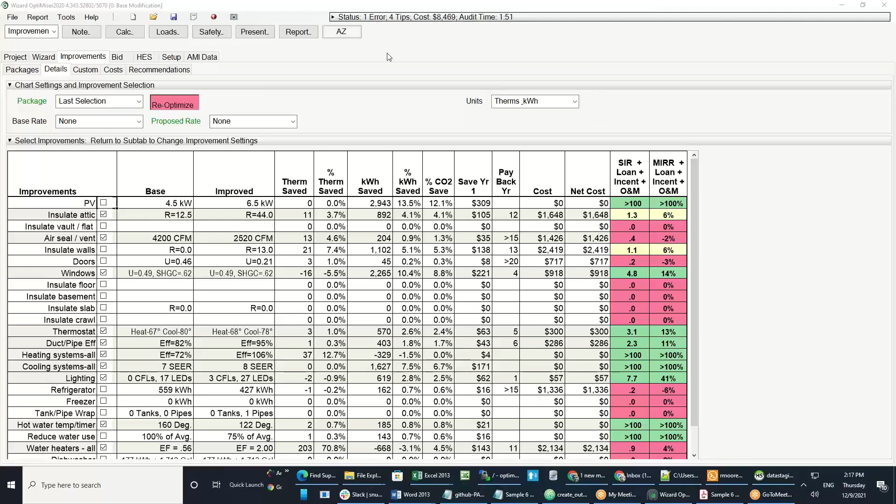Okay. Sounds... Trying to resize my application. There it goes, looks pretty good. Oh, that's even better.

Okay, all right, so I'm going to talk about all the special features we've built specifically for APS users. That starts here with the APS rate structure control, which appears on the project tab. This is where you can select from any of the current rate structures available to APS customers. This also appears in other places, but this is the first place, just as part of the basic project setup.

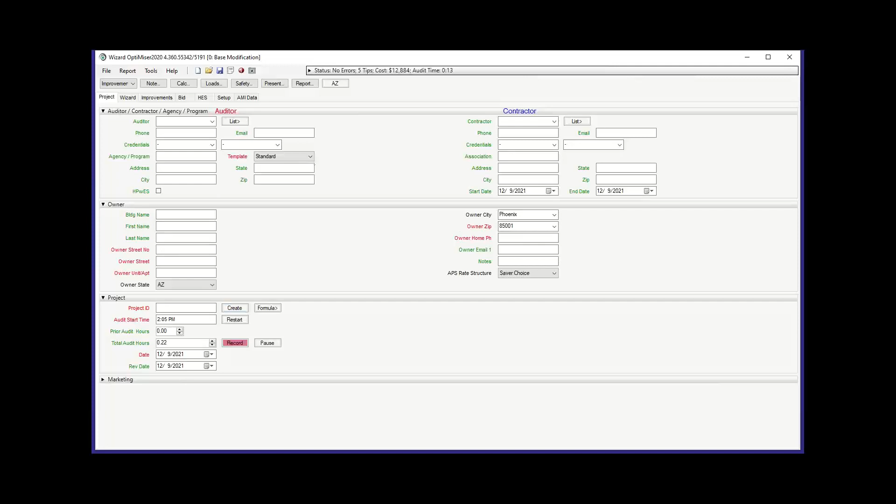So right now, you can select a couple of charts and then put in whatever text you want. But we'd love to get feedback, sample text that you like, anything like that on how you like to present this stuff.

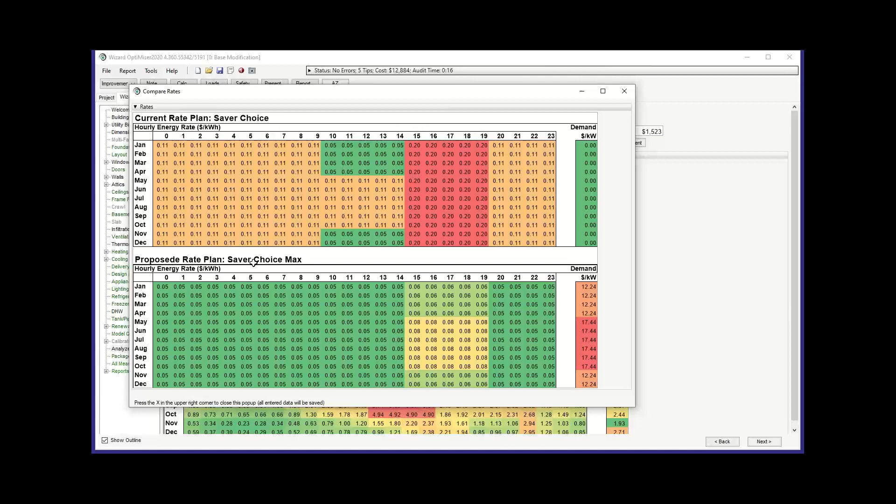Here I'm going for the saver choice. It's really heavy on the peak period kWh costs, doesn't have any demand charge, and then it's got super inexpensive off-peak rates. But when you go to saver choice max, you bring down all of your kWh costs in favor of having a demand charge.

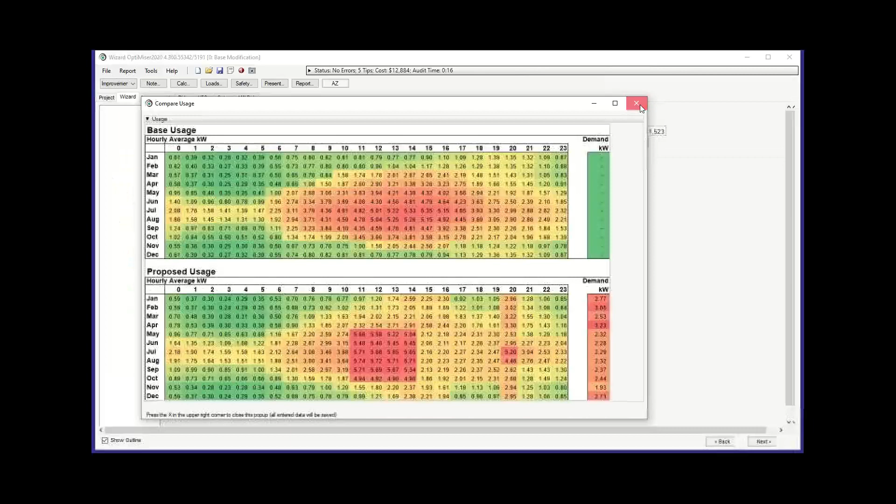This one compares the usage pre and post—the base building usage with the improved building usage—to let you see how you're moving loads around with your measures. And then this is the cost chart, basically the product of those other two charts: how much you're paying in each hour and how much you're paying for your demand each month.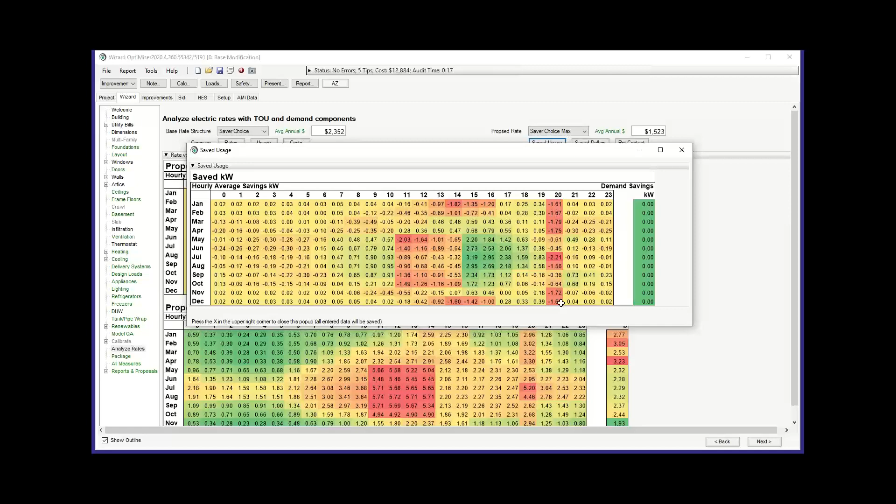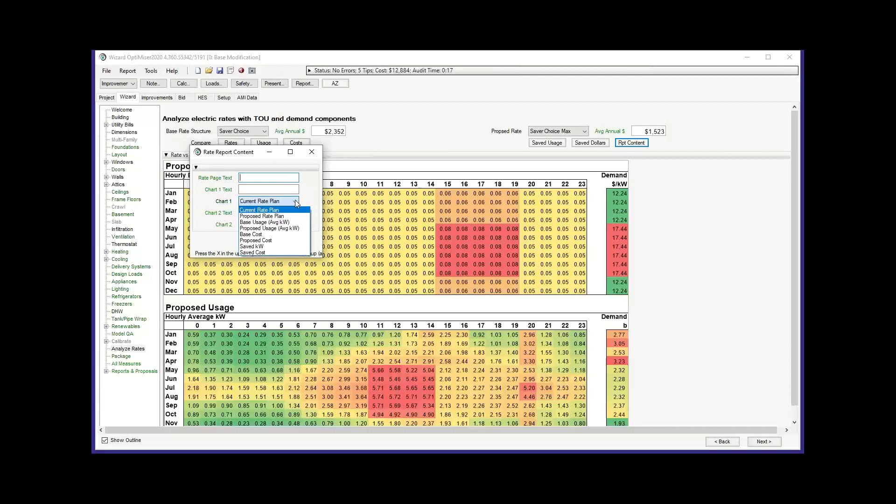You can also do that in terms of dollars instead of kilowatt hours. This is where you can pick which chart you want—you can show two charts, pick your charts, and then enter your text in the memo controls.

Any questions on that so far? All right, one word of caution on these annual totals: for demand charges, the model has pretty smoothed out curves of usage.

So it doesn't have spiky little bits of someone turning on an appliance here and there. Your overall annual demand charges are probably going to be underpredicted for most people, because by random chance they'll stack usages and end up with a demand charge that's a little higher.

Your savings, when you're improving the efficiency of any one of those items—the difference between the two—is still going to be good. So our predicted savings for demand ought to be pretty good.

We are looking at NREL, which just released a big end-use profiles database, and as part of that they have kind of stochastic, randomly generated usages which do simulate true usage, and we're hoping to integrate that at some point. But for now, that's just a word of caution when considering demand charges and total costs.

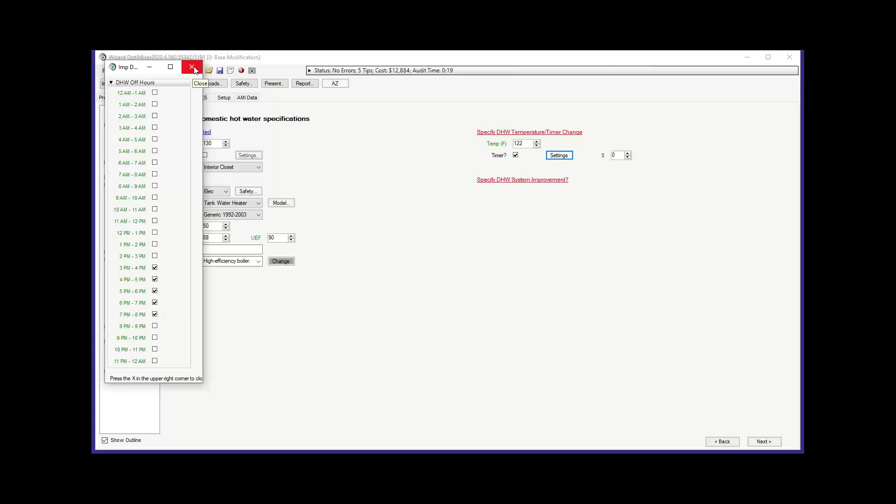If you want to specify a hot water timer, you'll click the specify temperature timer change and then check the timer checkbox. The settings allow you to set which hours. The default hours are the peak period hours for all APS rates, so you shouldn't have to change that. There's not a default cost, so that's something you have to set yourself.

And then the other major feature that we added is the addition of these pre-cooling schedules. If you click specify improvement, and then switch to pre or maintenance cooling schedule, this allows you to set what's your comfort temperature, what's your pre-cooling temperature, for how many hours do you pre-cool, and then if you're going to have a maintenance cooling schedule...

This is something I know APS has been piloting with some contractors, where they set up a schedule that only operates for a certain number of minutes out of each clock hour to limit the potential for a high demand charge. And these are the 4 schedules that they've defined.

So you can see here, I've got this schedule operating 20 minutes out of every hour. In order to run this model, initially this will be blank—this is a sub-hourly model. We use Energy Plus.

So the first time you use this, you'll have to download the whole Energy Plus and OpenStudio HPXML package. Could take about 20 minutes on a standard high-speed connection—it's a pretty big download. But after that, then you're all set.

So once you select that, this weather file will be empty. You have to click Browse. It'll automatically take you to the folder with the Arizona weather files. You pick your weather file, and then you click Run Model. That'll take around 20 seconds.

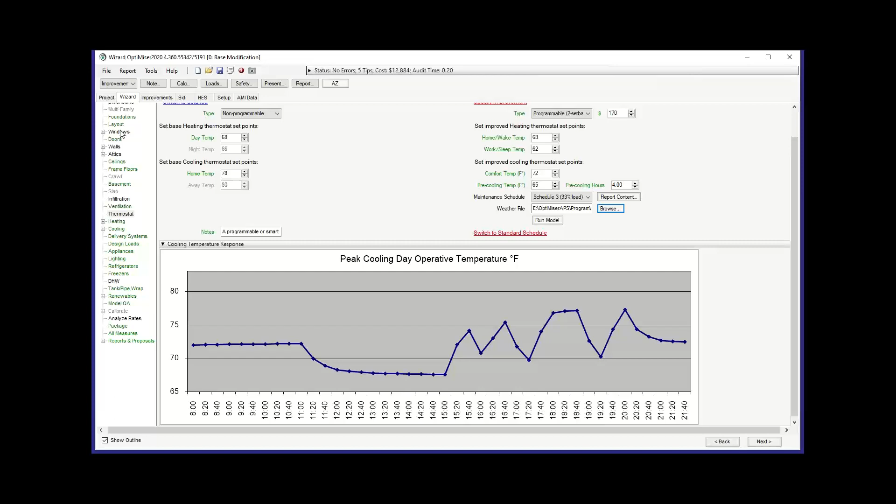So in this building, before I came here and did this, I went and put solar screens on the east, south, and west windows. I insulated the attic, and I did a ventilation or infiltration improvement. Before I did that, this internal temperature was getting up to 80 and above, and that was not going to work.

You wouldn't be maintaining comfort for the occupants. So this allows you to design a package where you can pre-cool, and then with the maintenance schedule, or in some cases even without a maintenance schedule, depending on the nature of the building, you might just float through that whole peak period without reaching an uncomfortable temperature.

Any questions on that? All right.

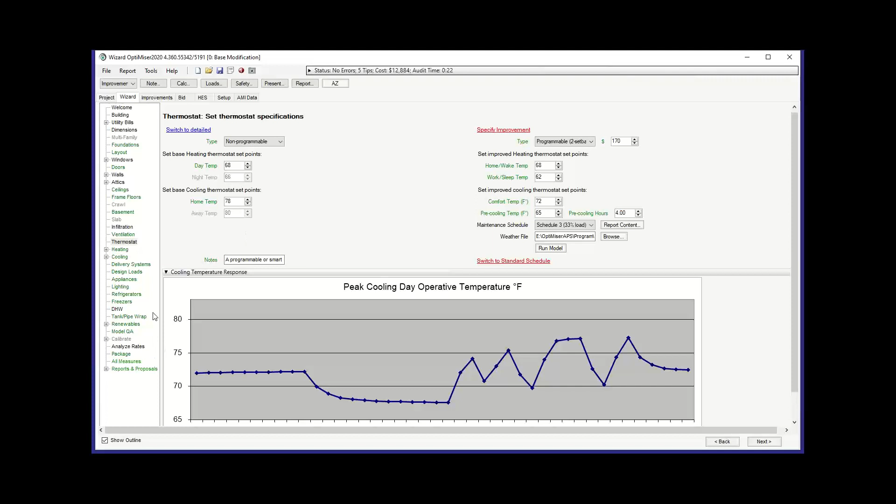So the last thing I want to cover is the AMI data analysis tool. So you can, with the cooperation of your customers, download hourly interval data from their customer portal with APS, and then those files can get loaded.

I have some samples of that data. It'll come in as a CSV file, and you'll just browse to it and load it up.

And then you'll get this heat map chart down here, which shows you hourly usage for the entire year.

You can toggle on whether or not you're hiding weekends and holidays. So here you can see the weekends are highlighted, and you can see differences between weekend and weekday behavior. Typically you want to hide it because if you're focused on reducing peak charges and demand charges, weekends and holidays don't count, so you keep that hidden.

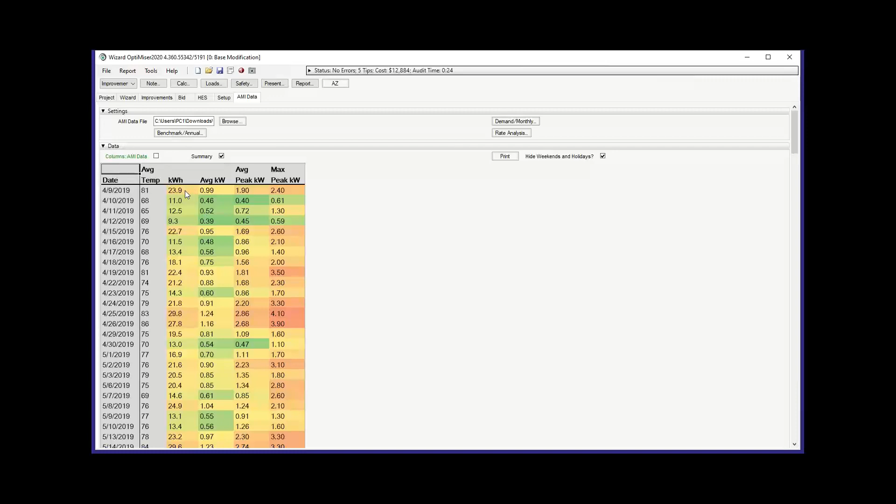Let's see. This just allows you to look, instead of at the hourly data, at the total kWh, the average kW, the peak, the average kW during the peak period, and the max kW during the peak period.

And then there's a whole bunch of analysis that we do on this data. So APS had wanted us to develop some kind of benchmark that you could use to compare homes and get a sense of what kind of pre-cooling measures might be possible based on what's the benchmark we developed, which is a watts per square foot of cooling.

And that's at a 95-degree daily temperature, so it's kind of like middle of summer. What's your watts per square foot of cooling?

And then there's a bunch of other things that we pulled out here, just interesting ways to look at the data. And this is a regression line that compares the average kW for the day versus the cooling degree days for the day. This regression line is what we use to develop this benchmark number. It's essentially a transformation of the slope of this line.

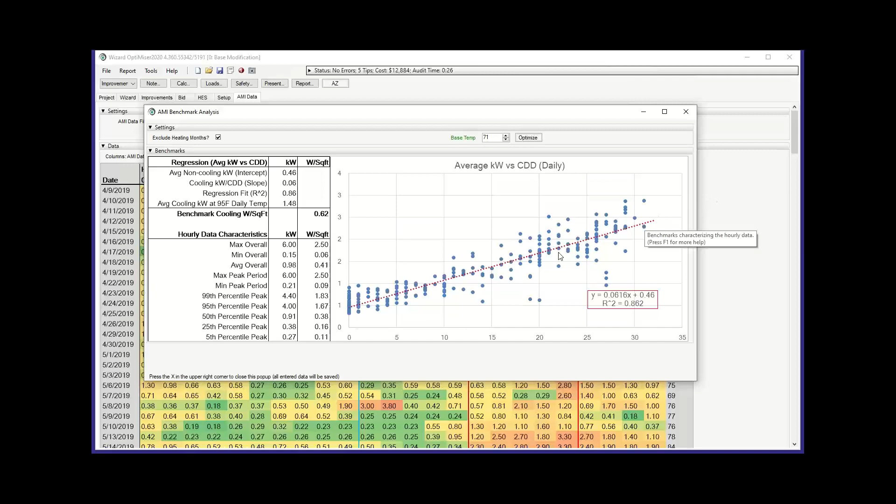If there is electric heating in the building—so this building doesn't have electric heating—checking this actually gives a slightly better result just in terms of statistical confidence, though it didn't make a big difference in the top line result. If you had electric heat in the building, you have to have this checked, because otherwise we can't identify what's the base load and then properly isolate the cooling component.

This table is basically where you can get a sense of what your demand charges are. So that's the demand, the kilowatts for the demand charge hour for each month. And then it's got a few other things in here, just to help you understand the monthly differences.

And then the final item here is this rate analysis. So this is a different rate—this is just a way to play around with the rates. This is a different rate selection from the ones that we showed before. This one's not being applied to the model; it's only for this analysis to let you see different rates.

And this then shows you an analysis of this rate applied to this AMI data. So it's not based on the model, it's based on their actual usage, and so you can compare what their cost would be for this actual usage under different rate plans.

So this gives you a good gut check on recommending rates when compared to their actual usage patterns. And it's got a few features here. This is kind of just like a quick and dirty way to estimate how much they could save.

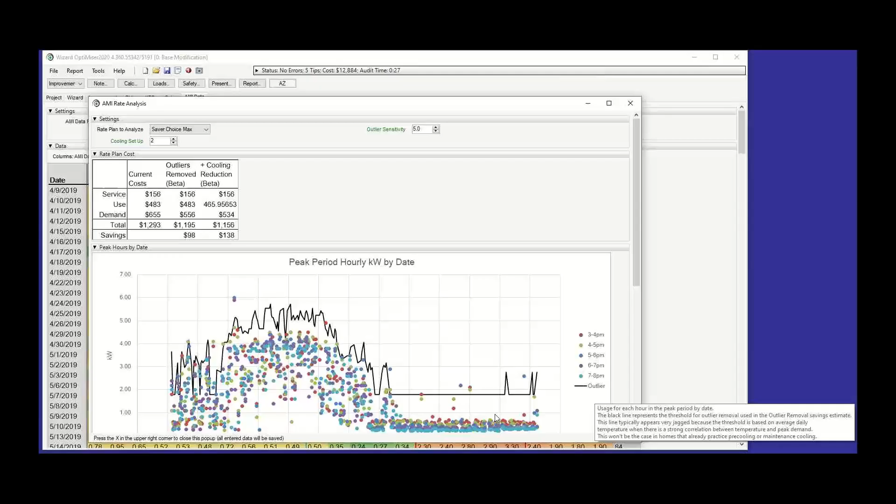So this one has outliers removed. You can see here that this line is attempting to determine what you could expect as typical usage, and anything above that line is like they just did something weird—turned on too many appliances at the same time. This is to give them a sense of how much you can save just by being a little more thoughtful about your usage. No changes in your overall usage, but just trying not to stack up usages or turn on something that's a really high draw during the peak period.

And then this one is a real simple estimate of how much you could save just by setting your thermostat up 2 degrees during the peak period. So no pre-cooling or anything, just taking a small hit to your comfort to save money during the peak period.

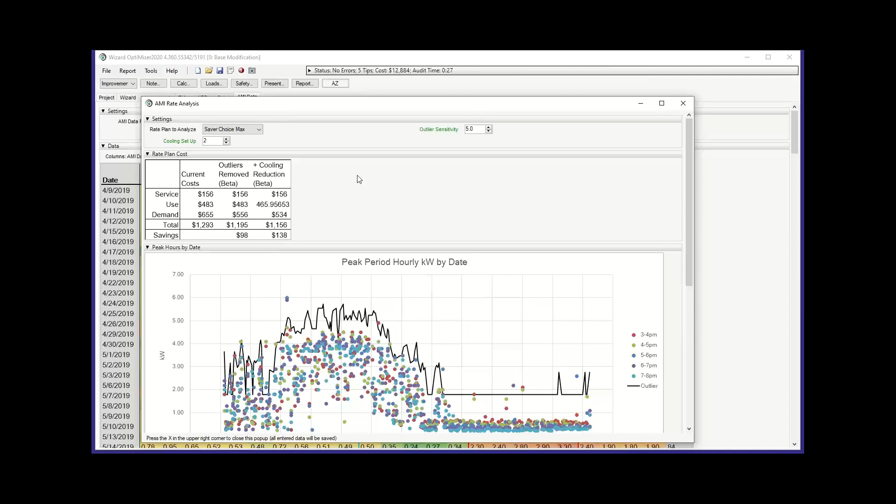At this point, none of these things are appearing in the report. Again, we were hoping to get feedback from folks—if there's something here that you like, or something that you think, if I could just look at it in this way, it would be a perfect way to communicate with my customers, let us know. It's easy for us to dump any of these things into the report. So if there's something you want included, let us know.

Any questions about that?

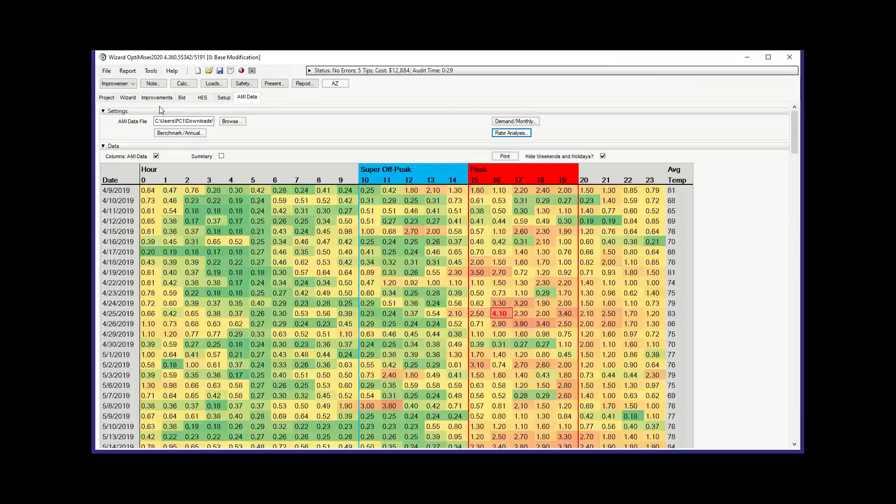All right, I thoroughly confused you all, I assume. A lot of new information. My clients are trying to keep it simple for their customers, but I'm fascinated by what's available here. Thank you. Sure, and if it's too complicated and there's anything you think we can do to make it easier to digest, we'd love to get feedback.

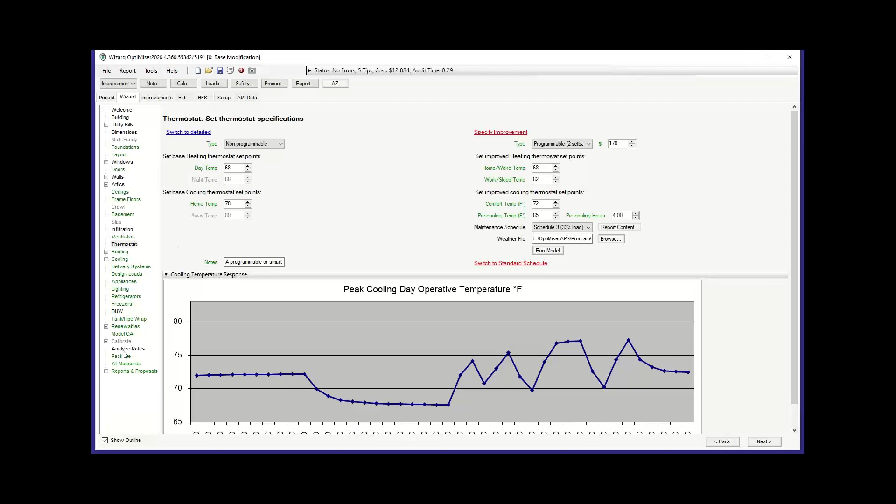I think the most important things are to get the right rate in there and at least check out what some other rates might look like for each home. Great, thank you so much.

So we hit our time limit here. I just wanted to emphasize, first of all, thank you so much for joining and doing this. Please do stay in touch. There were a couple major pieces that we asked specifically for input on. One is the report, specifically with this new time of use rate analysis and AMI data—it's a complicated world, complicated for you guys, and complicated for the customers.

So if there are any ways you've found that make it easier to convey important information—how much savings potential there is, all the good things you're doing for them, the options you've reviewed, how you demonstrate the work you've put in, the different measures Gamal highlighted, or general education about what time of use means and how customers can get the most out of their rates and the improvements you've put into their house—those are all things we want to include in the report. We're doing a lot of research in this area too, so please give us feedback.

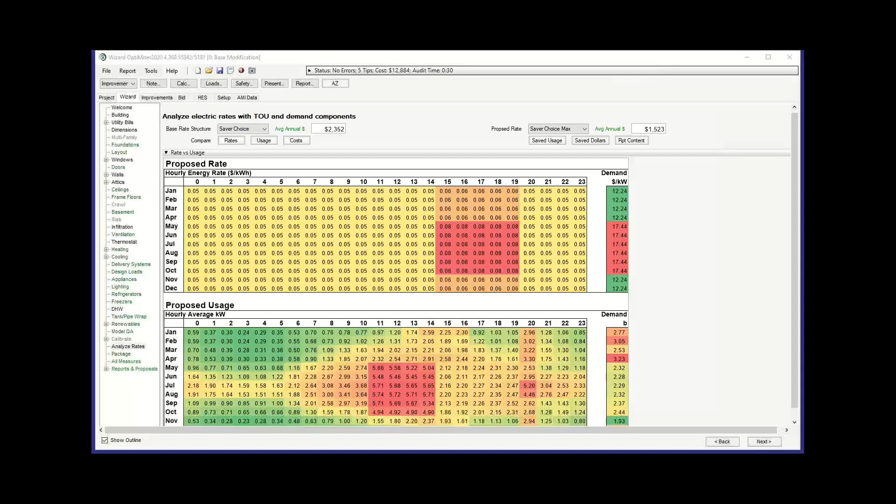Thank you, guys. All right. Thank you, Rusty. Always appreciated. All right. Thanks, Jerry. Bye-bye. Bye.